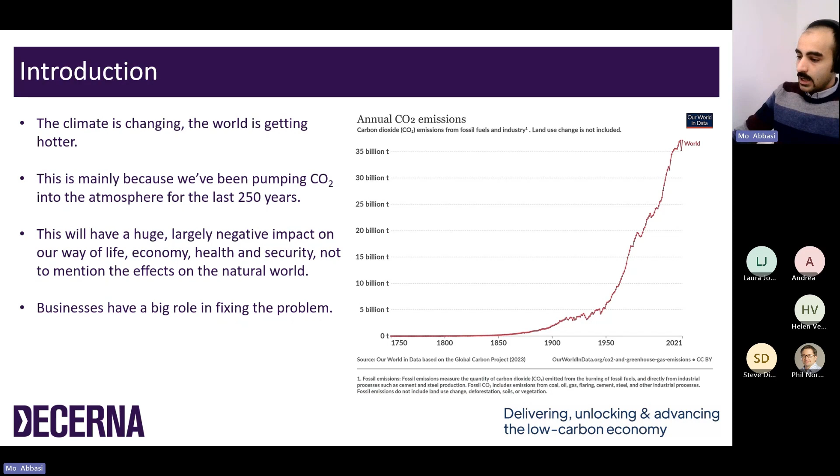Businesses generally play a big part in this, and can prevent or at least decelerate climate change, which, apart from the carbon reduction and environmental impact, creates some side financial opportunities and other opportunities for your business and company, and we will discuss them in the next slides.

So when it comes to climate change and global warming, every single half a degree matters. And one might think that it's okay, it's only 1 degree Celsius. I personally appreciate it. Here in Newcastle, it means a longer summer maybe, but it doesn't work like that.

The fact is that global warming, even very small temperature rises on a broad global scale, can have devastating results, because it directly increases the risk of sea level rise, wildfires, extreme weather impacts, species extinction, pandemics, drought, food insecurity, climate migration, and so many other problems on a global scale. And all of these consequences are sort of interconnected.

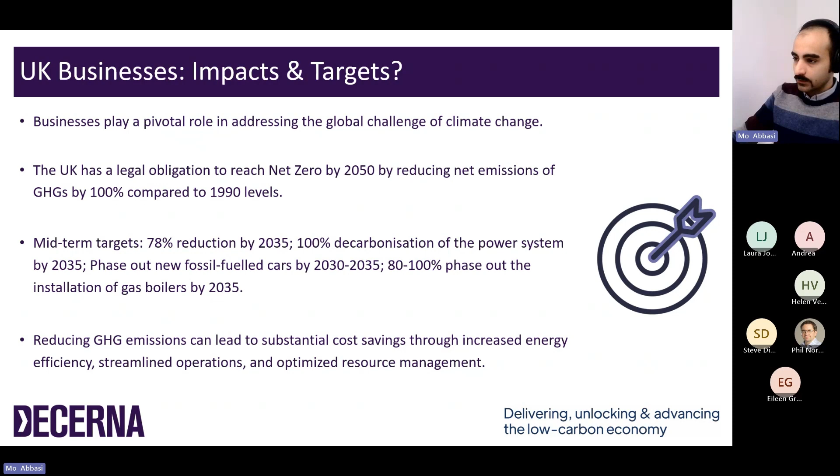And hopefully by the end of this session you will have the information you need to decide and know what options are available in the market for you to start this journey. Okay, let's start with some of the main principles that we all need to understand before being able to plan and design our decarbonization plans.

The first one, and probably the most important one, is emission scopes, which are the standardized way of categorizing greenhouse gas emissions based on their source. This categorization helps us account for all emissions, avoid double counting, and also identify the biggest gaps and the biggest opportunities within your business.

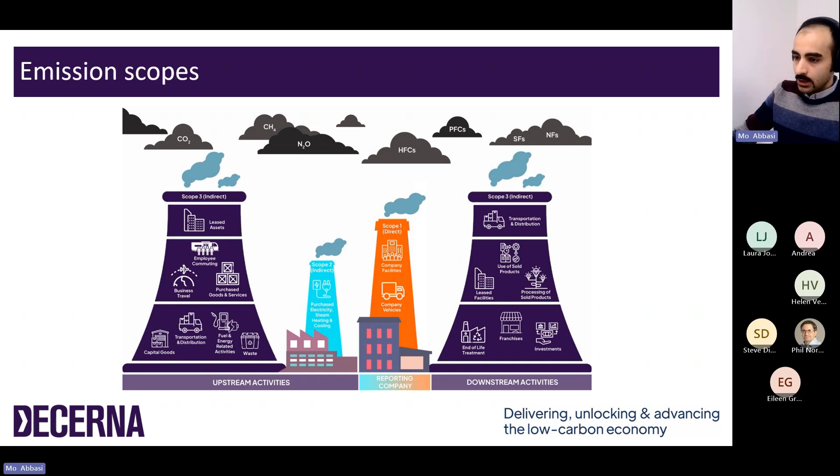Very briefly here, scope 1 are the direct emissions from sources owned by the company. Scope 2 are indirect emissions from the purchased energy that you consume in your premises, and scope 3 is all other indirect emissions from the company's operations. So the measures that we're going to discuss today mainly affect scope 1 and 2 emissions.

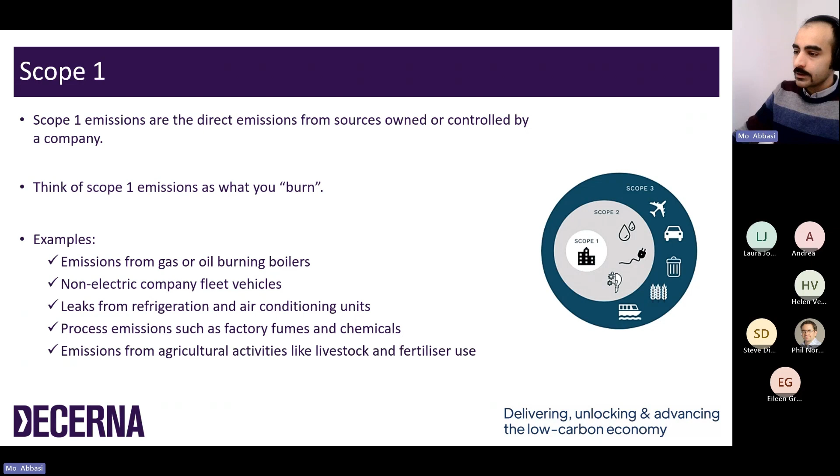Again, as we touched on, scope 1 covers the emissions from sources that your organization owns or directly controls. Some of the most obvious examples are the gas or oil that you're burning in your boilers, company vehicles that are not electric, leaks from the refrigeration system and all the refrigerants used in the equipment of your company, process emissions such as factory fumes and chemicals, and lastly emissions from agriculture activities.

Scope 2 emissions are GHG emissions associated with the purchased energy for your company. For most SMEs, scope 2 is just the electricity you buy from the grid, but you might have some heating from heat networks that goes under scope 2 emissions, or you might have some purchased steam for your industrial processes.

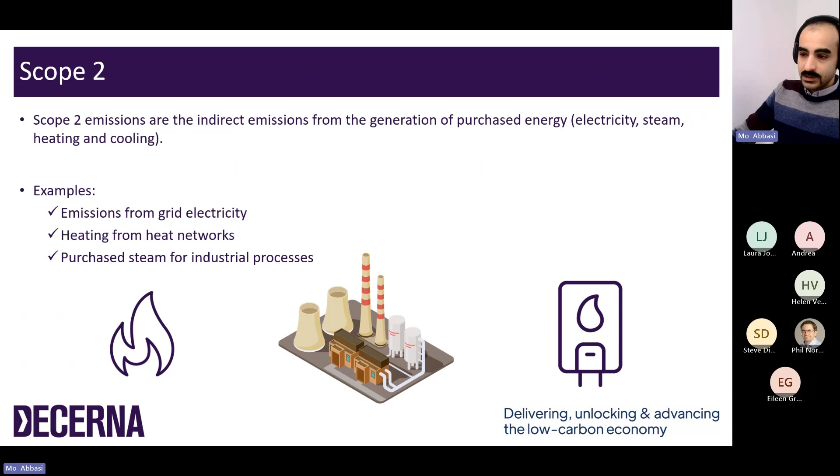And finally, scope 3 are all indirect emissions associated with the upstream and downstream activities of your company's value chain. Basically, all other indirect emissions which are not included in scope 2 can be categorized under scope 3, which for different businesses can vary between 50 even to 70–80% of the company's emissions.

Some examples are business travel in vehicles not owned by the company, staff commuting, emissions from purchased goods and services, for example raw materials, paper, coffee, IT devices, anything that you buy for your company, transportation of these goods, and also all emissions from own assets of the company. For example, if you have any investment properties, acquisitions, or other lending activities, they also need to be taken into account within the emission calculation of your company, and also the emissions related to waste management and disposal.

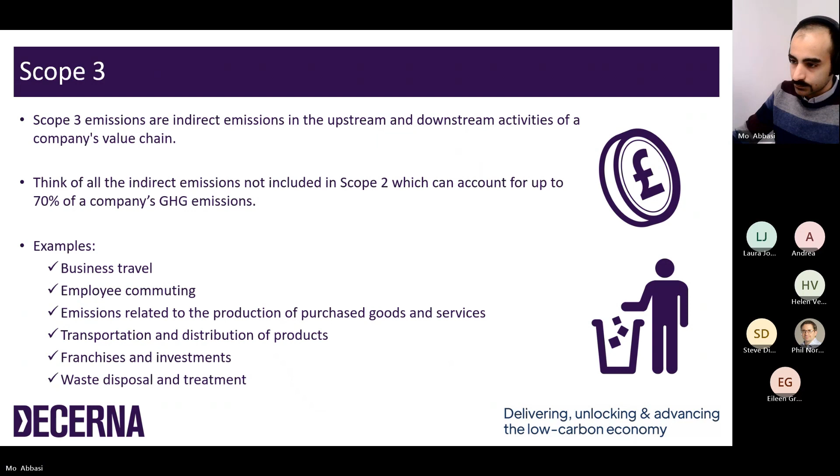But what does net zero mean? Net zero is the next fundamental principle that we need to comprehend. Net zero refers to a state in which the greenhouse gases going into the atmosphere are balanced by removals from the atmosphere. Achieving this balance between the emissions we generate and the emissions we remove or save, we call net zero. It can be achieved through a combination of two main strategies: one is reducing emissions as much as possible, and the first strategy needs to be combined with compensation for emissions by equivalent carbon savings elsewhere.

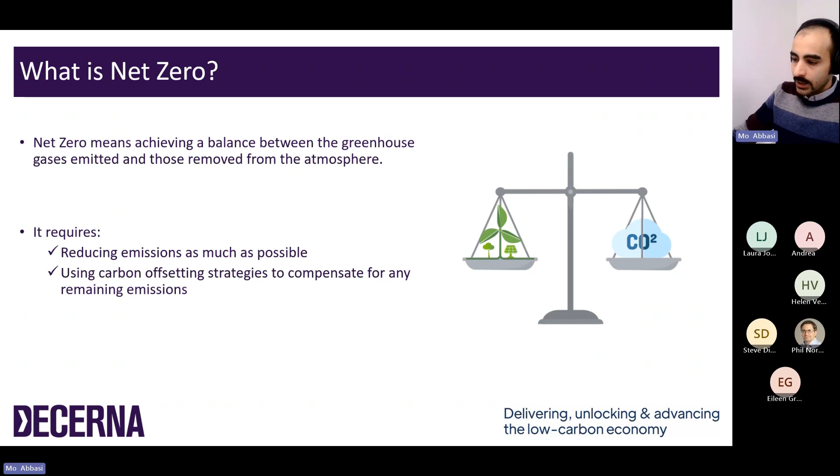But carbon offsetting itself can be achieved by two approaches. Firstly, compensatory offsets, which means buying emissions reductions from elsewhere. It means that you pay towards projects to reduce carbon emissions elsewhere, for example investment in environmental projects, renewable energy, waste management, and that sort of projects.

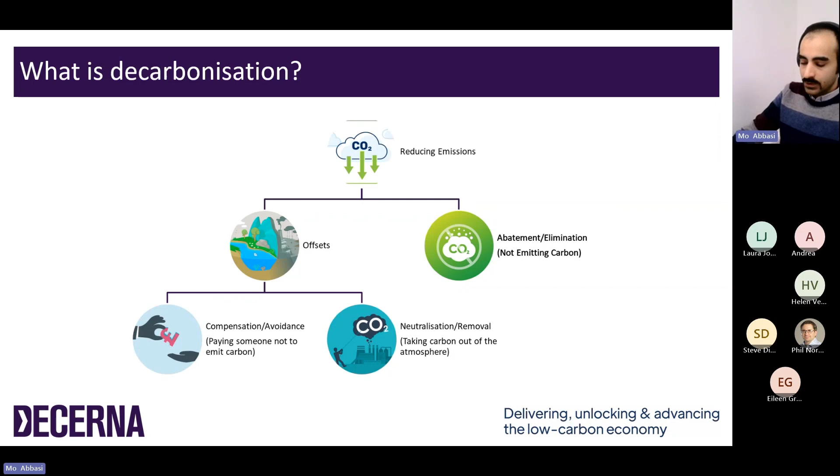And the second approach is carbon removals, using technologies like carbon capture and storage, or tree planting and reforestation. But carbon offsetting alone is not enough and doesn't make you carbon neutral. This should be accompanied, as we said, by implementation of suitable measures to proactively reduce your carbon footprint. This means avoiding emitting GHGs in the first place. This approach we call decarbonisation.

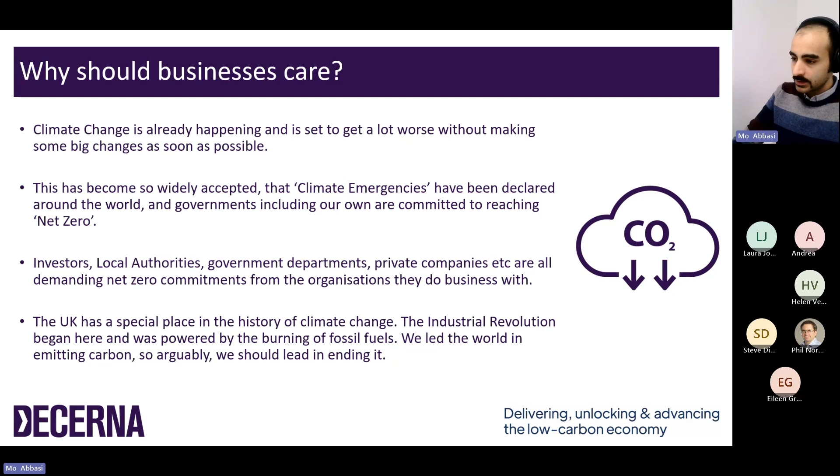So, as a business, why should we care about CO2 emissions? First and foremost, obviously, is the climate emergency and our social responsibility to tackle it. But apart from environmental and social responsibility, there are other benefits to reducing carbon emissions for SMEs as well. The first one is reducing operation costs. Cutting carbon emissions goes hand in hand with boosting energy efficiency, which means lower utility bills and other expenses. So although taking actions imposes some upfront costs, at the end of the day, when you have implemented them, you will definitely save money in the long run.

It also boosts your competitiveness in the market for your products and services, because customers are increasingly conscious and caring about environmental issues. So carbon reduction boosts your brand value and your reputation in the market. It also helps you keep up with regulatory compliance. We have, for example, the CRP requirement for government procurement, a regulation recently set up for businesses who want to trade with government in major contracts, and getting ahead of regulations and market shifts positions businesses to thrive in the long term as this transition continues.

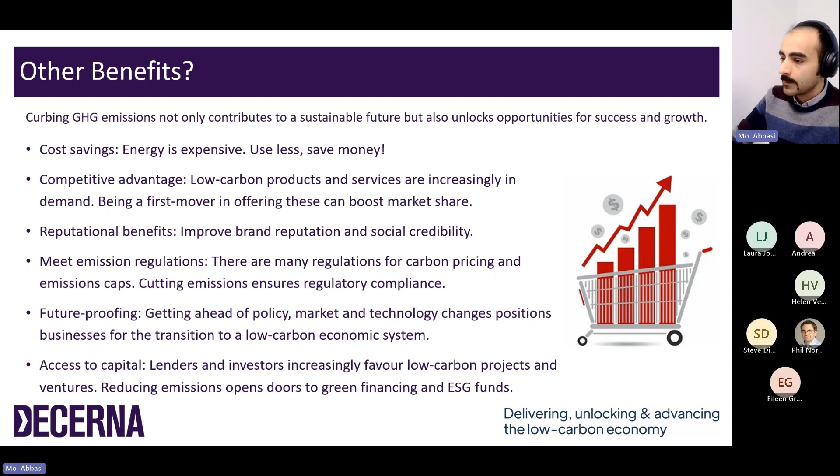And last but not least, it will enable funding opportunities and grants for your business which are allocated to businesses who want to be green, and there are lots of local council grants and governmental grants that you can apply for and use for your company. But where do we start our net zero journey?

In the third step, this is the step where we produce the carbon reduction plan, the CRP, which we touched on, and which is increasingly becoming central in the space, and is now the requirement for, as we said, major contracts with the government, and this is also one of the services that we provide. But today we are mostly focused on the fourth and fifth stage. Based on this plan, the next step will be implementing the energy efficiency and renewable measures and emission reduction interventions.

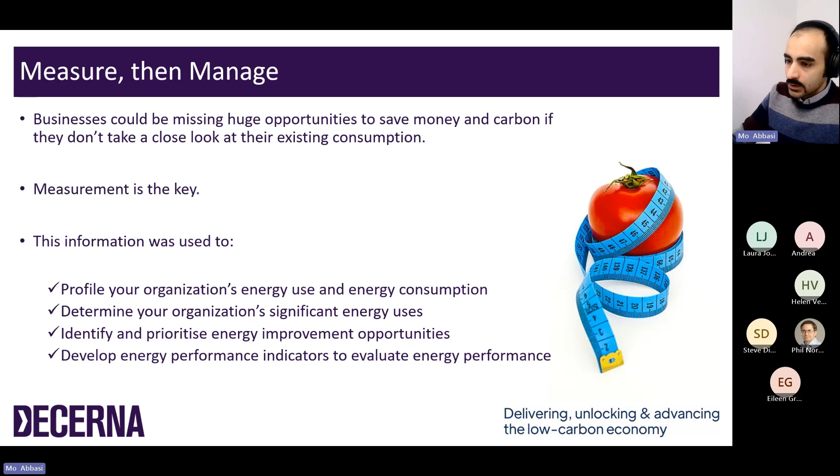The energy data that we need to collect as the first step can be obtained by measuring the energy consumption from utility meters, from electricity and natural gas, mainly located in the property. These data are often available in the utility bills, but more regular monitoring is also highly recommended to keep a record of the energy usage in shorter intervals, for example, every week or even every day. But if you have a smart meter already installed in your premises, you probably will be able to get the half-hourly data from the smart meters.

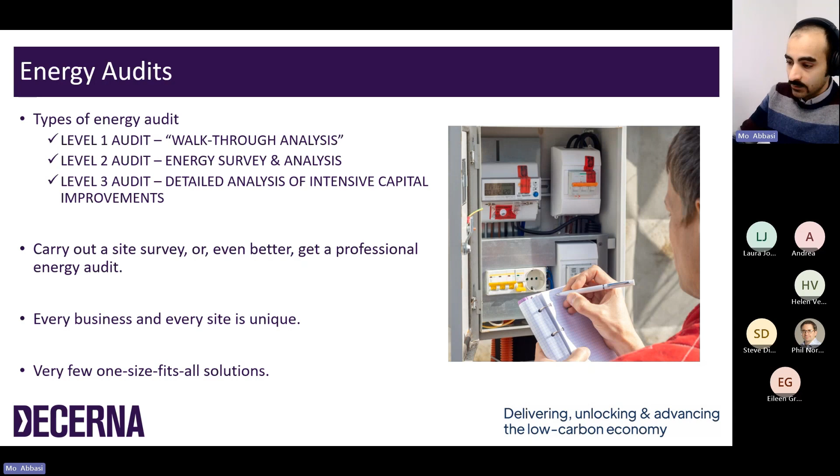But just that first level of energy audit gives you enough information to identify areas that require immediate attention and come up with some purpose-built and customized measures to reduce the energy consumption and also boost your environmental performance. Or, for level 2 or level 3, you can hire a professional energy auditor to conduct a more comprehensive one. But most of the quick win measures that we're going to cover today can be done based on the level 1 energy audit.

But let's give some top tips to help energy audits if you want to do it yourself. Basically, we need a record of all the energy consumption within the company, how, where, and when the energy is being used, and what is the regular routine of the energy consumption of the company. Therefore, we need, first of all, as many photos and notes as possible. You need to take photographs of building features, for example, the windows, insulation, HVAC systems. We need to take photos of lighting fixtures, appliances, and the plug loads.

Also, we need photographs of equipment nameplates where we can find their make, model, serial number, power rating, and information like that. Also, we have to make notes of the runtime hours, the temperatures, the environmental conditions, the notes that might be helpful in the future for planning and designing the energy efficiency measures. We also need to speak to regular users of the equipment and appliances at the premises, ask them how and how long they use appliances or equipment, if they perform well, or if it seems that they have some problems.

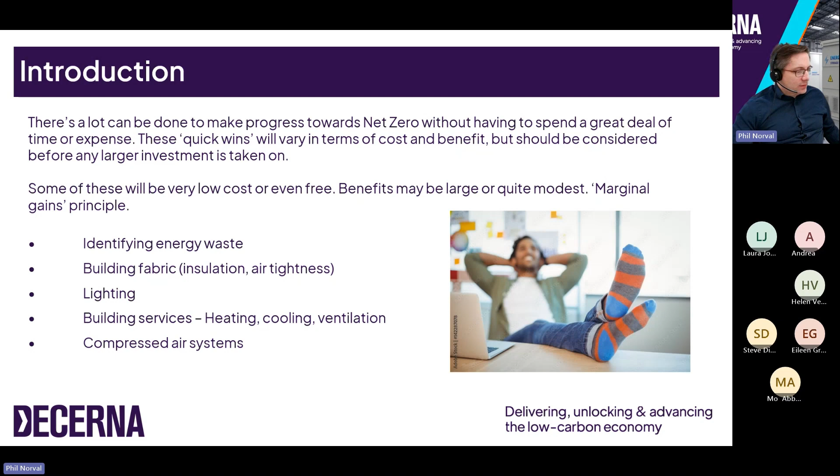And after that, I'll jump into a separate session just to introduce some concepts around renewables. So after the quick wins, we'll talk about the slightly more costly renewable energy systems for a little bit. So firstly, identifying energy waste.

We do an awful lot of site surveys, and as Mo mentioned, quite often the fresh pair of eyes is as much a benefit as any expertise that we might be bringing to the site. It's often the case that people are so heavily focused on doing their own work, working to their strengths and just carrying out their day-to-day duties, that they're not necessarily concerning themselves too much with energy efficiency, which is quite understandable. Energy efficiency is not always the most convenient thing to consider when doing your work.

For example, if it was in a factory, somebody might leave one of their tools switched on or one of their machines switched on just because it's convenient to have it on and ready for when they next need it. But it may be using energy the entire time it's on, even if it's just sitting on standby or idling. And that's a potential source for energy waste.

And it's things like that that businesses often overlook or just don't have the time or resource to consider day to day, and often they'll become blind to a lot of these things because thinking of it in any other way is kind of a hindrance to just going about the normal day-to-day work. So to make some easy improvements to energy efficiency, it requires somebody either from outside the company or from inside the company just to take a different perspective, take a step back, and think about these things from another angle, paying particular attention to energy efficiency.

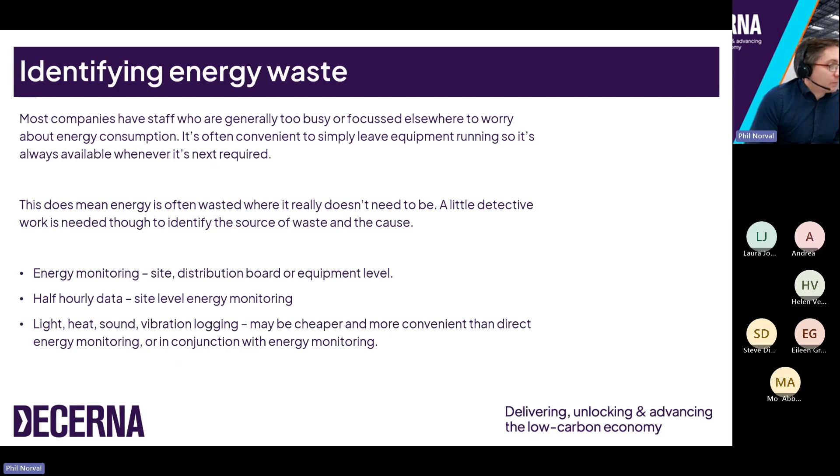And you can measure energy use indirectly as well, using things like environmental monitors and meters that record things like light levels or the temperature in a room, to indicate when lights are switched on or when heating is running, or in the case of a factory, if there's a lot of motors that are running, you can just record the sound or the vibration of that equipment, and that would indicate when it's been switched on and when it's been switched off. From that you can then work out how much energy it's consuming and how much of the time it is operating, and if that time use profile matches the work schedule, or if equipment might be getting left switched on outside of working hours, for example.

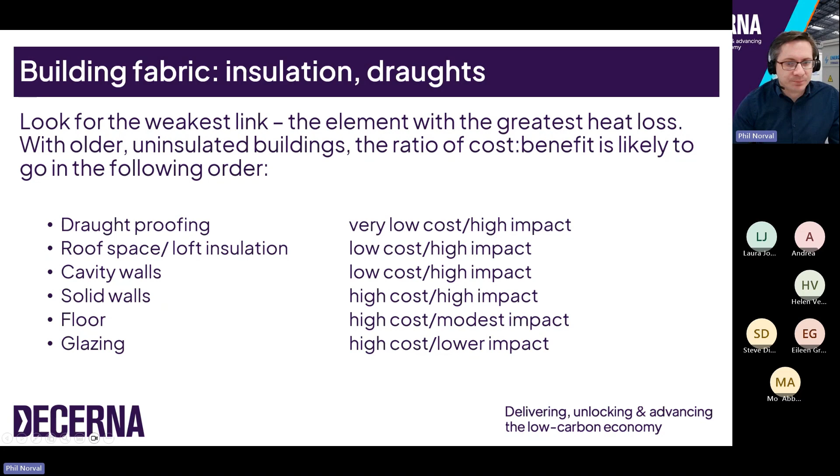So just bear with me a sec. Yeah, so

As I mentioned, draught proofing is the thing to do first, especially if you're looking for low cost options, or even no cost options in some cases. It's one of these things that is usually such a low cost with such a large impact on energy efficiency that it's probably worth doing without worrying about specifically how much energy it's going to save or how much it's going to cost to install, because it's one of these technologies that can generally be installed by people on site, by unskilled staff, with no specialist training needed.

A lot of the products that are used to draught proof a building are designed for consumers to install. And the draughts in buildings, poor air tightness in other words, is often the biggest component of heat loss in a building, particularly in commercial buildings. And therefore, it's probably worth just making sure that draughts are eliminated wherever possible, without needing to run any sort of particular feasibility study or business case assessment or anything like that.

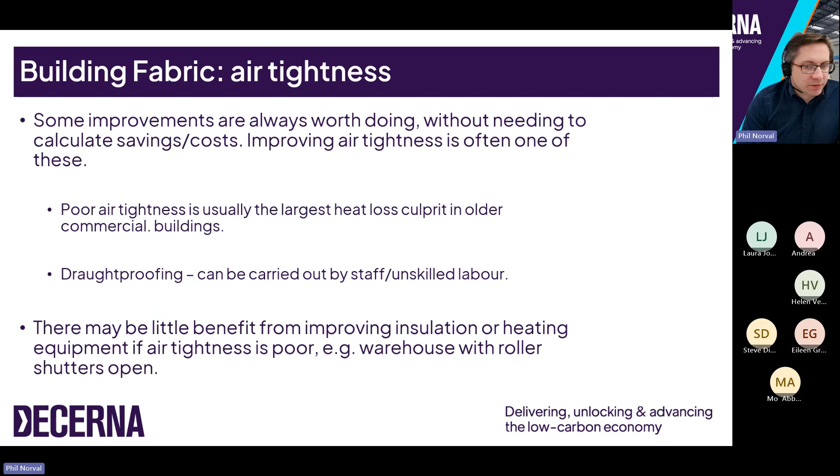So when it comes to draught proofing, it's actually more than the simple effect of reducing heat leaking out of a building. There is actually a compound effect that makes it doubly effective for the comfort level experienced by people in a building. Not only does sealing up draughts prevent heat escaping from a building, it also reduces the amount of air movement in a building.

So you've all heard the term wind chill. That's a sort of extreme version of this, but basically the more air movement there is, the more of a cooling effect there is on people's skin. And so you'll be familiar with the feeling of sitting in a draught, and that's not necessarily cold air blowing on you. It's just the fact that there is air moving at all. Air at a given temperature feels cooler if it's moving than if it's stationary.

So draughts in a building will increase the amount of air movement, and therefore for people to feel comfortable, the temperature needs to be that little bit higher where the air is moving around more. So sealing up draughts will have that double effect of preventing heat loss, but also making people just feel more comfortable at any given temperature.

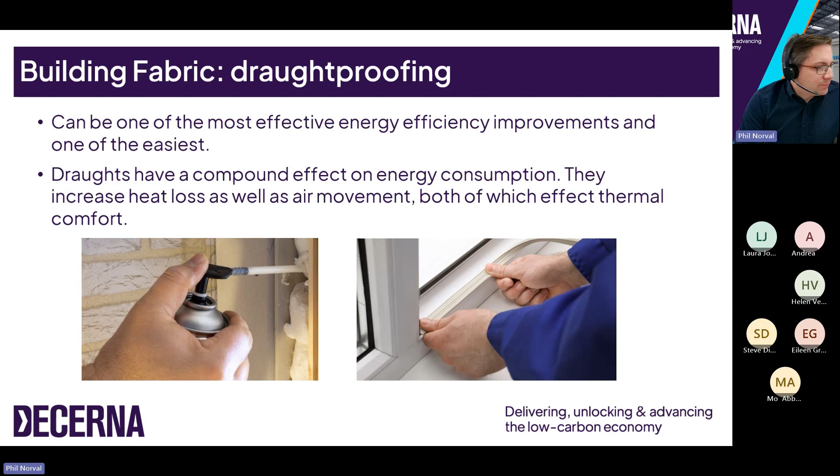So when it comes to draught proofing, it's worth doing a kind of site survey, really, to assess where air is leaking. It's quite easy to identify draughts. You can feel the cool breeze wherever there is a draught, as I'm sure you're aware. But it's worth carrying out one of these surveys even if you think that there have been air tightness improvements installed sometime in the building's history.

Over time, things like the foam rubber seals around windows and doors can deteriorate or they can be painted over. It's quite common to see these draught seals being gloss painted, and then they become far less effective, and they can become compressed and then begin to allow draughts to re-emerge through those openings. So it's worth just going around and seeing if those seals are actually doing their job. And it might be worth replacing them or adding more sealant into those areas.

There are cases though where simple improvements like adding some foam or brush strips or tape just aren't up to the job. Buildings do move over time. Things like windows and door frames and other sort of joins in a building can open up, and it can become such a problem that you do then need some professional help.

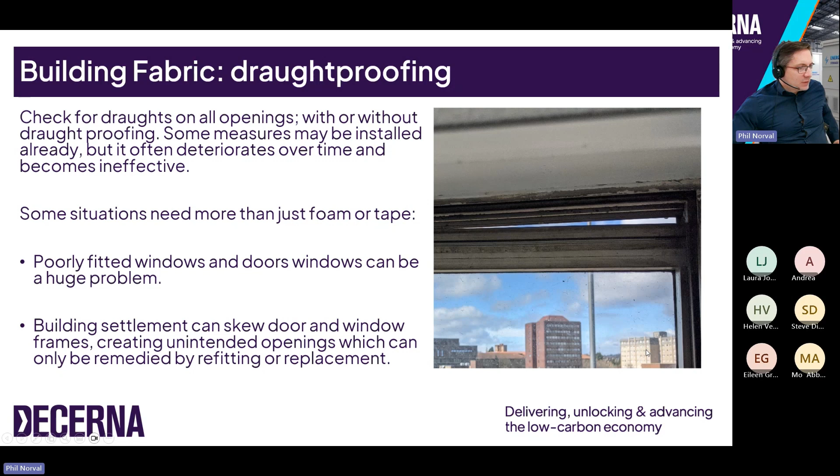So as I showed a few slides ago, there's this hierarchy of building fabric or insulation improvements. Once you've sorted the air tightness of a building out, it's then worth thinking about the strategy for improving insulation and sticking to that kind of hierarchy. If it's possible to insulate your roof space, carry out loft insulation; that's usually the cheapest and one of the most effective things to start off with.

It doesn't require a great deal of skill to install. It doesn't require a huge amount of disruption, and there's very little in the way of cosmetic remedial work required afterwards, because usually the loft insulation is out of sight and there's no actual fixing down required. So the cost is pretty low.

Similarly with cavity wall insulation, that's usually a similar price per square meter of insulation, but it's usually not as thick, so the energy savings from it aren't quite as good as loft insulation. You can see in this table the general cost per square meter and the payback period go in that kind of order. After cavity wall insulation, there are options for solid walls where there's no wall cavity, which you could insulate either internally in the rooms themselves or on the outside of the building.

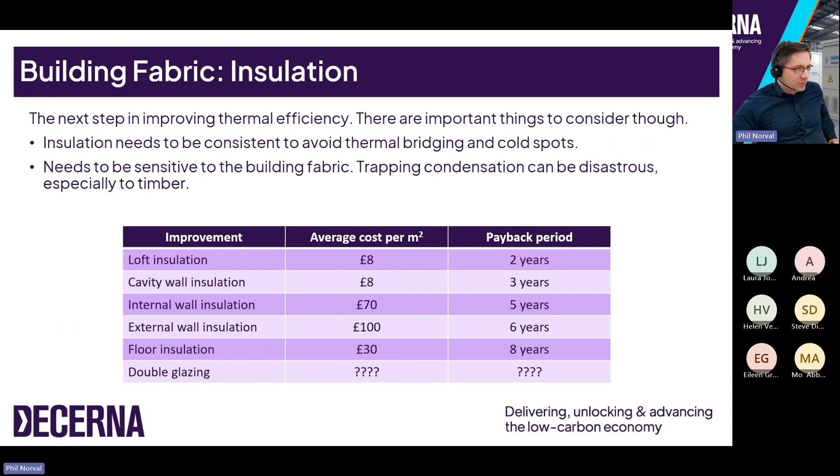In other words, if you have a business that replaces its old single glazed windows with double glazing, how long do you think it might take for the energy savings from that improvement to pay for the initial cost of the double glazing? My colleague Helen is going to unleash a quick poll on you, just so you can have a guess.

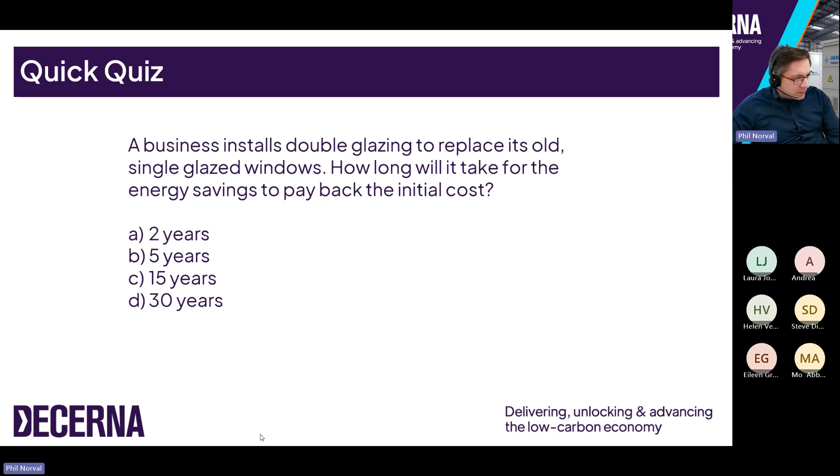Right, I'm just going to find my slides again. Here we go. Right, thanks for that.

So that was building fabric. I'm going to jump into LED lighting briefly, which is something that is pretty well understood now, and it's pretty well accepted that LED lighting in most situations is going to save energy compared to the older lighting types. And in fact, now it's really the only option that you have in almost all situations for new lighting.

There was a phase out that happened last year, towards the start of the autumn, which made it illegal for manufacturers to produce any new fluorescent lighting tubes. So even the more energy efficient thin type, what they call T5 fluorescent tubes, but also the older types of fluorescent lights, industrial lighting like metal halide, and I think high pressure sodium as well, not because of energy efficiency, but because all of those have some amount of mercury in them.

The environmental impact of disposing of them meant that they were no longer acceptable. And once retailers have sold out of all of their old stock, you won't be able to buy them anymore. So LEDs in nearly every case are the only option left. By default people will be installing new LED lighting, and they generally will save at least 50% of the energy consumption of lights if you're replacing older fluorescent lighting or similar.

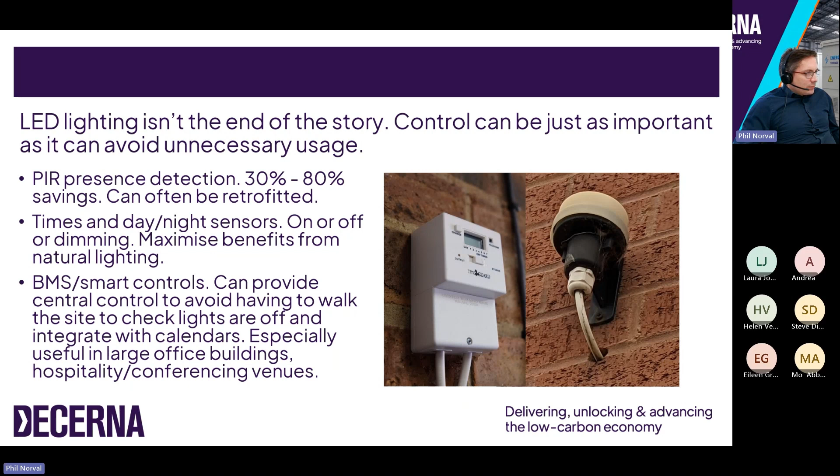It's worth being aware. I mentioned security lighting and outdoor lighting, but the traditional way to control these things is often with one of these mechanical time clocks. If you ever look in a plant room or a meter cupboard, it's quite common to see one of these, as shown in the photo there. They do a job. They switch lights off at a certain time of day and switch them on at a certain time of day, but they're very limited, and they're often completely ignored.

When they're installed, they're set up in a certain way and then never touched ever again. But they're not always set appropriately for the current use of the building. They only have a single on-off setting. So the major problem with them is that they will operate in exactly the same way 7 days a week. And so if you have a car park that has lighting controlled with one of these, for example, you may not need that lighting on over the weekend when there's nobody there.

Again, you probably don't need the same settings in the summer as you do in the winter. And so these kind of controls are not particularly smart. And in the case of a site that's closed during the weekend, you might be using 2/7 more energy than you actually need to. There's two days out of 7 that you don't need that lighting on, but this control type isn't sophisticated enough to deal with that.

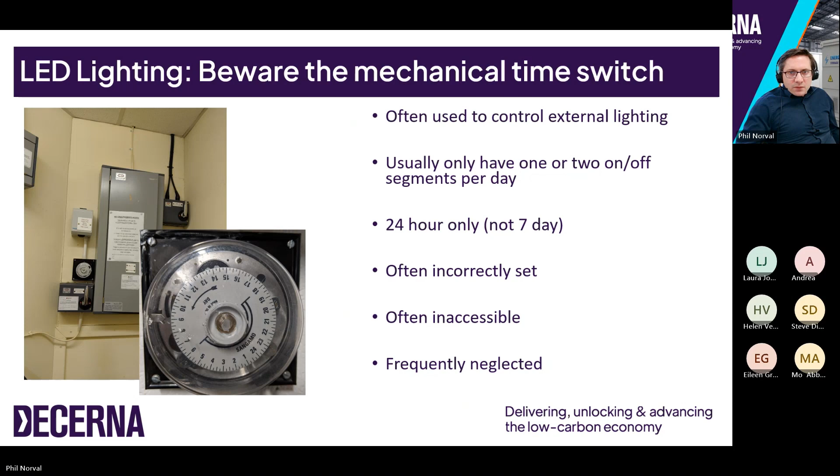So jumping now into... I'm just going to check the time actually. Oh, we're okay.

So we'll talk now a bit about heating, ventilation, air conditioning, or HVAC for short. Some elements of this people will be pretty familiar with, specifically the heating side of it, but the ventilation and the air conditioning is something that is usually left to experts to understand. But there are things to consider that don't need a great level of expertise to make improvements to. And so in general, there's some things to consider with these sort of systems.

I recommend that somebody in your company takes a look at least once every 6 months at things like the time settings for heating, ventilation, air conditioning, and the temperature set points that they've been programmed to. The reason I say at least once every 6 months is, especially where there's heating and cooling in a building, you have a heating season which usually starts around October and ends around March or maybe April. And conversely, you might have a cooling season which covers the other half of the year. And so these heating and cooling seasons run for half the year.

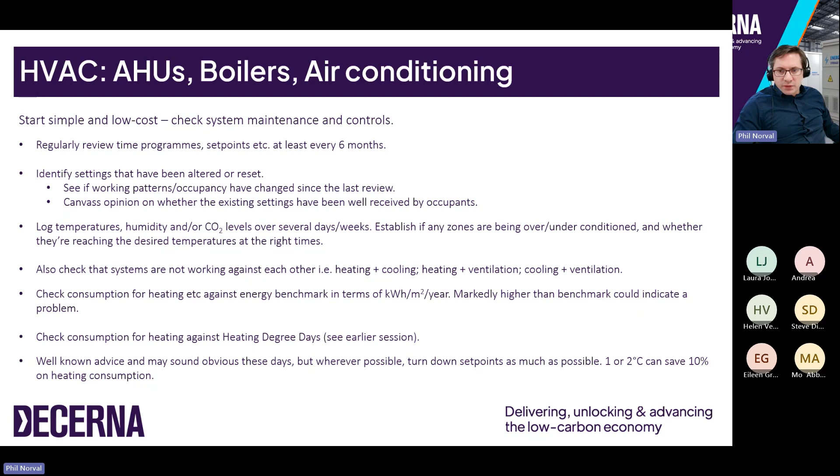Yeah, so that's some general points for heating systems, but getting into some more specifics, talking about simple improvements in terms of lagging of pipework. Again, this is something that can be done by non-specialists very often, unless it's a really sophisticated commercial plant room. But it's really common when you go into a boiler room to find there's lots of pipework that's not insulated properly.

And it's one of the worst places to have uninsulated pipework, because boiler rooms in particular are usually very highly ventilated where there's a commercial boiler, because they need air to mix with the fuel to burn properly, but also the ventilation is to get rid of anything like carbon monoxide that might have collected if the boiler's not operating properly. So it's a safety issue as well.

But the effect of having that much ventilation in a boiler plant room is that the space is effectively outdoors. The indoor air is mixing so quickly with the outdoor air that you're basically exposing any unlagged pipework to the outdoor air. And if you imagine the temperature of the outdoor air versus the temperature of the pipes, the heat lost to that air can be huge.

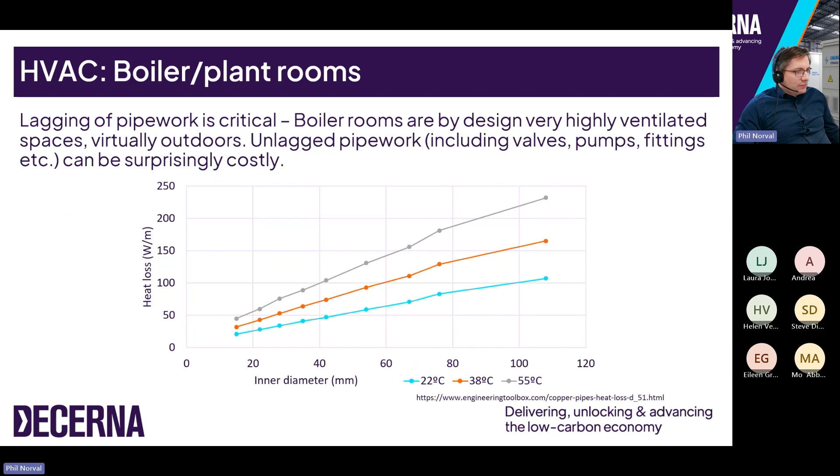So even pipes that are in the indoor space, the heated spaces, if they're unlagged, it represents heat loss that's completely uncontrolled. So if a boiler is running, but a particular room doesn't have its radiator switched on, the pipes feeding it will still be hot, and so they're giving heat into a room that doesn't require it. And so entire sections of buildings can have their heating switched off, but the pipes are still hot. And so without lagging those pipes, it represents a huge source of energy waste, or at least lack of control of the heating system.

Any pipework that is out of sight, particularly above ceiling tiles or in roof spaces, is often left uninsulated, and those spaces are not classed as part of the heated space. And so without lagging those pipes, it can be a huge source of energy waste. Above ceiling tiles, it's really common that there's openings in the walls at the sides of those spaces to let pipework in or to ventilate them for some reason. And so again, the outdoor air is circulating really well around those pipes, and the heat loss therefore can be really, really high. And because it's out of sight, it's often out of mind.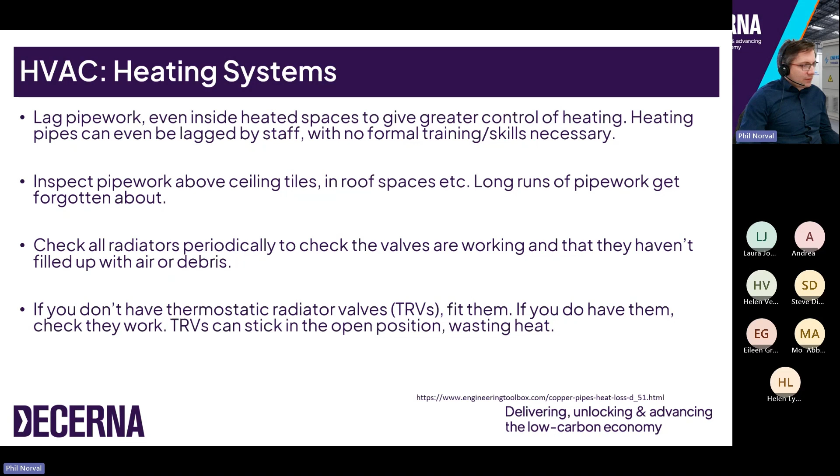But either way, it's either zero cost or very low cost to improve it, and it can save, particularly in a room that isn't in use, a huge amount of energy, because it can be the difference between a radiator operating at full blast or being switched off. And so it's another thing to consider during a site energy survey, just to verify that those valves are actually working properly.

So we've talked about heating systems, but another related area is domestic hot water. So the hot water that comes out of taps and showers. It's usually a smaller overall energy consumption, but it's quite often the source of a lot of unnecessary consumption as well, particularly in larger commercial buildings where they have what's called a secondary circulation system. If that's not something you're familiar with, basically you will have experienced being in a building where the hot water tap is a long way from the boiler or the cylinder, and it takes an age for the hot water to come out of the tap.

To avoid that happening in larger buildings, it's common to have this loop of pipework around which hot water is being continually pumped, so that there's only a short distance from that loop to the actual tap or shower outlet, so that for the convenience of people in the building, the hot water is readily available without having to wait for it to come through. So it's a really nice, convenient thing to have, but as you might imagine, that loop of pipework is nowhere near as well insulated as the cylinder it might be coming out of, if it even is insulated. It's really common to find these secondary circulation systems have no lagging on the pipework, either in the plant room or around the rest of the building.

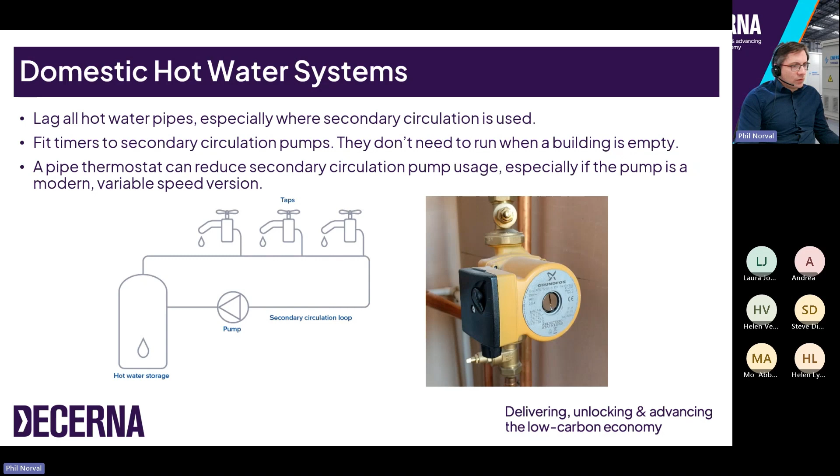This is a bit of a counterintuitive thing to consider, but in buildings where there's really long runs of hot water pipework to the outlet, so if there's a boiler room at one end of a building and a hot water outlet at the other end of a building, there could be a huge amount of heat lost just in the pipe that takes the heat from one end to the other.

And so although something like a gas hot water system is comparatively pretty cheap per kilowatt hour of energy compared to something like an electric hot water heater, the fact that that sort of situation can lose so much heat to the environment through the pipework means that the alternative option of putting a simple electric water heater at the point of use can actually be significantly cheaper than sending heat all the way from the boiler to where it's needed.

Also, in some situations you might be heating up an entire 100 or 200 litre hot water cylinder just to provide hot water for the short amount of time it's needed at the other end of a building. So in that kind of situation, you're heating up far more water than is actually needed for the demand. And so something like a small point of use electric water heater can be tailored to the demand a lot better. Although it's more expensive per kilowatt hour, the number of kilowatt hours used can be much lower by that setup. So it's a bit counterintuitive, but in some situations it's probably worth considering.

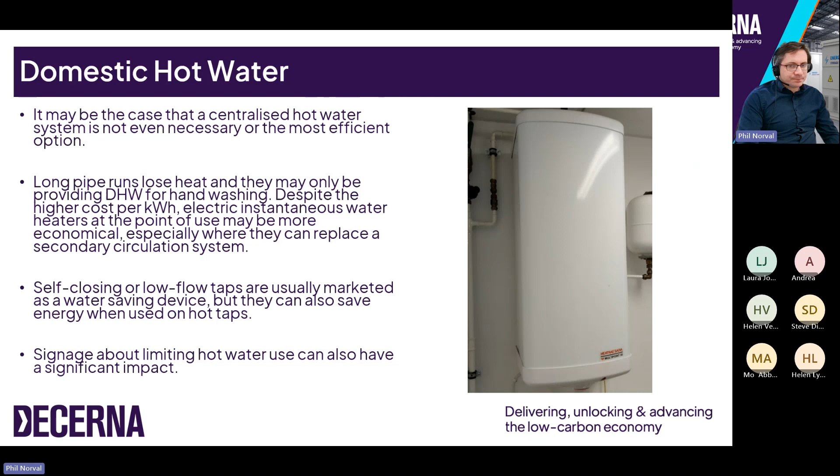So in other words, if you double a fan speed, you'll actually increase energy consumption by 8 times. It's not even a square relationship, it's a cube relationship between those two values. And so just modest changes in fan speed will have a huge effect on energy consumption. So if you're looking at upgrading a ventilation system, getting some sort of automatic control with variable speed fans will definitely save a lot of energy.

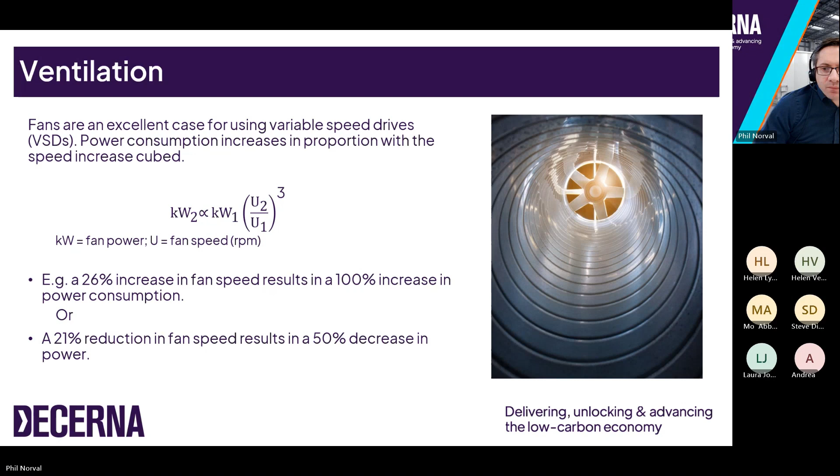Moving on from ventilation, just briefly to air conditioning. It's increasingly common in this country to have air conditioning in buildings, for 2 reasons. Partly climate change, temperatures are getting higher, particularly in the summer in the UK, but also there's been a trend to have more and more electrical equipment in buildings than there were historically, particularly in modern offices.

You've got so many computers, printers, other electrical devices, for either productivity or just convenience or luxury. The number of electrical items in most buildings is much higher than it used to be, and all electrical items give off some amount of heat. It's more obvious with things like printers and photocopiers, but collectively the amount of heat given off by electrical equipment has gone up a lot over recent years, and that is often combated with air conditioning.

But before anyone installs any new air conditioning or switches the cooling on in a building, it's worth considering: is it even necessary? Are there other ways to reduce the temperature of the air in a space other than just switching on cooling systems? Another reason why cooling is becoming increasingly common, particularly in modern office buildings, is the amount of glazing that is used in the building's construction.

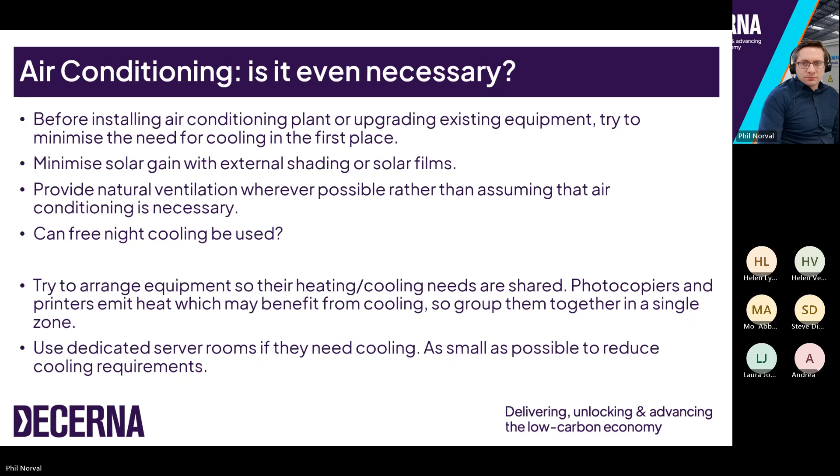Again, similarly to ventilation systems or HVAC in general, ensuring that they have been properly and regularly maintained is key to their efficiency. So where you do need air conditioning, make the most of it and make sure it's properly maintained. Often, again similarly to mechanical ventilation systems, the outdoor units in particular are nearly always installed high up on a wall or on a roof somewhere. And so they're usually completely out of sight of most people in the building. And so they'll get forgotten about if there's not a regular maintenance program in place. And it's kind of assumed that it'll just continue to work forever without any intervention by anyone.

But again, air conditioning units have heat exchangers with these aluminium fins all over them, and they'll get a buildup of dirt and dust, and even things like weeds will grow up around them. Birds may build nests next to them. They will gather dirt and dust really quickly, and if they're not properly cleaned and maintained, the efficiency of them will drop off a cliff. So getting somebody to look at them at least once a year is really important.

And also make sure that the refrigerant pipework that carries the cooled refrigerant into the building is properly insulated and that the lagging around it hasn't deteriorated or been chewed by rats or pecked by birds. That'll have a really high impact on the performance of the system.

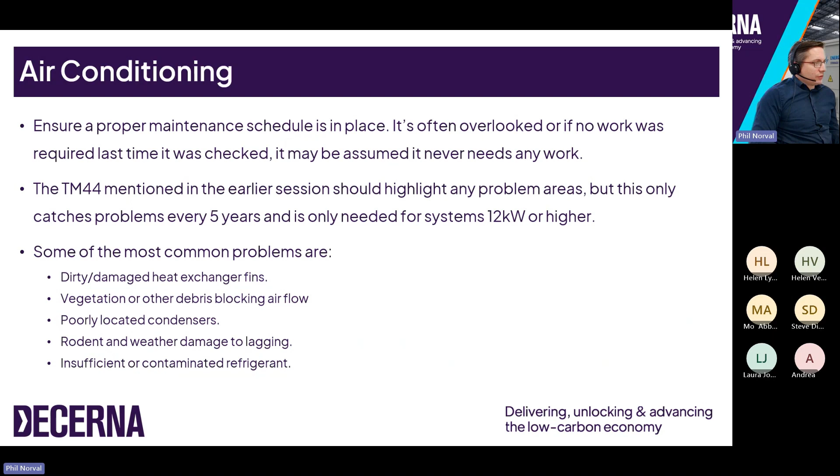If they're on auto, then the time programs and temperature settings can be used to switch the boiler on and off as appropriate, but in hand mode, they're just on. And so the energy saving controls of the system have been completely sidestepped in this case, and so the system is just wasting a huge amount of energy.

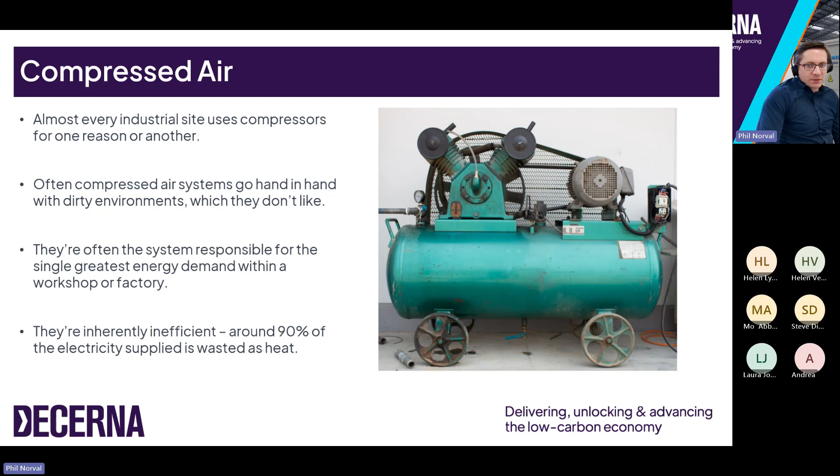The ongoing air distribution system, so the air lines, pipework around a site that takes compressed air from the compressor to the tools and machines that use it, is something that needs to not be ignored as well.

It's really common when we visit a site where there's a compressor that there's just a deafening hissing sound coming from all sorts of places around the building, and that hissing noise is compressed air leaking out either from tools or from pipework or fittings. And usually that doesn't need to be happening, but these hissing noises in a noisy factory often will just get ignored.

And like we said about having a fresh pair of eyes on site, a fresh pair of ears is really helpful in these situations, because people do over time just become deaf to these kind of leaking noises. But getting somebody that isn't always on site just to have a quick listen, they'll be able to remind people or point out where there is air leaking if it has been ignored.

If the environment is so noisy that you can't hear air leaking, there are relatively inexpensive ultrasonic leak detectors, and ultrasound is really directional, and it can be easily picked up by these detectors and can show you in which direction the sound is coming from, so you can actually pinpoint the source of air leakage, and they can be quite effective to find them.

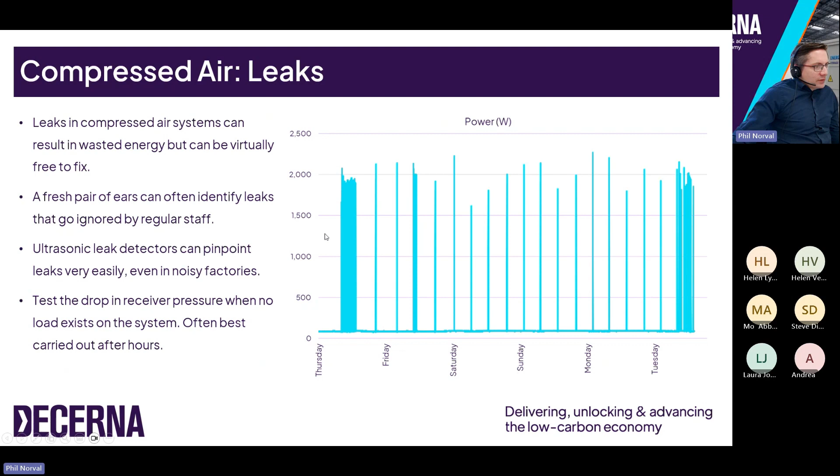Just going to do a quick quiz question. You've already seen it, in fact, earlier on, but now that you can see the context, we're just going to run a quick poll to see how much you think a fairly modest air leak might cost per year. So if you have, for example, a flexible hose with a 3mm split, so pretty small split in the hose, how much do you think that might cost a business on average per year? There'll be a poll coming up in just, actually I can't see the screen. There, so yep, have a go answering that question there.

Okay. So yeah, a mixture of responses there. So it's actually, hang on a sec. Yeah, so most people think £1,000 a year. That might have been true a couple of years ago until energy price inflation went through the roof. It's actually closer to £2,000 a year just for that tiny little 3mm split in a pipe.

So you can imagine in a factory where there's several of these leaks, just getting a small, almost zero cost repair done. It might even be a case of tightening a pipe fitting. So virtually zero cost to fix these leaks can rapidly amount to thousands of pounds saved each year. And so it's one of these things that seems really small, but it can have a huge impact on the cost of the energy for a business. Yeah, thanks for that. Whenever we do a site survey, we love to find air leaks because it's such an easy thing to fix and has such a huge impact.

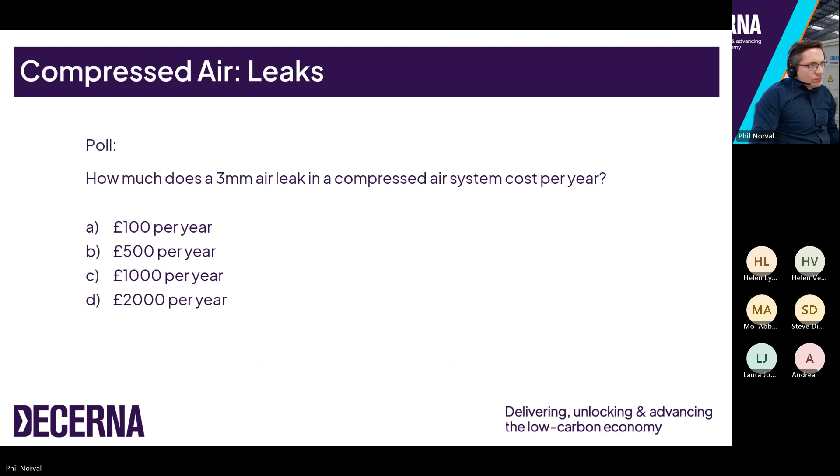So just a little bit more on compressors. Reducing the overall demand from compressors is the easiest way to save energy. So firstly, it's really common to find that the set point pressure of these things is higher than any of the equipment that uses the compressed air actually needs. If you can reduce the pressure set point from say 8 bar to 7 bar, you'll be saving literally thousands of pounds a year if the compressor's used all the time. So carry out a review of the equipment using compressed air and just make sure the compressor isn't set too high for it.

Again, the older compressors or smaller compressor systems, they'll have some sort of drain system to get rid of any condensate, any water in the air that's in the pressure vessel.

Some older systems, the only way to get rid of that condensate was just to dump all the compressed air out of it. And I've seen sites where people drain the entire compressed air system on a daily basis just to get rid of any water in the system, because water is quite damaging and will corrode the pipes in the pressure vessel over time and could become quite dangerous.

So getting rid of the water is important, but modern pressure vessels should have some sort of drain that doesn't require venting all of the compressed air out. But also, particularly with larger systems, you can get air dryers which take out the humidity in the air before it gets into the pressure vessel.

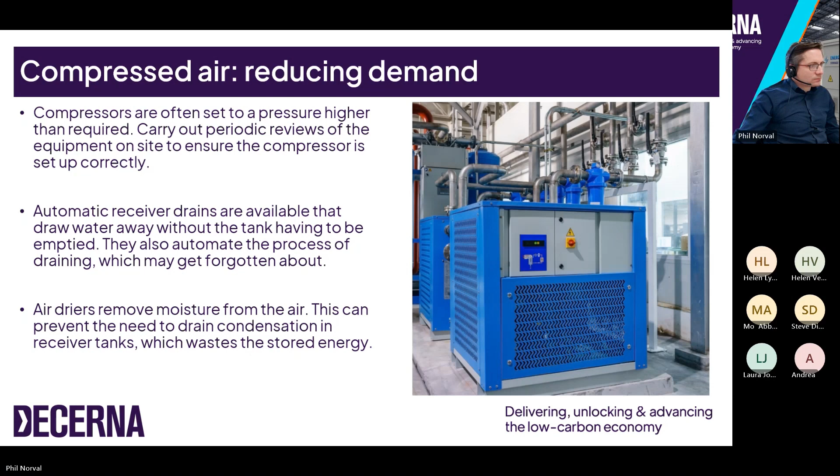Finally, on compressed air tools, particularly things like wrenches and sanders, air hand tools in particular, they're really traditional, really common, because they're so powerful and portable, and they're really, really common in factory situations.

But because things have come quite a long way with cordless battery-powered tools in recent years, it might be worth seriously considering not using air tools at all anymore and replacing them with modern cordless battery-powered tools, just because they're so much more efficient, probably safer as well.

If you remember that a compressor is inherently at best about 10% efficient, once that compressed air gets through the mechanics of the tool and down the air hose, the overall efficiency is going to be well below 10%. But compare that to a modern lithium-ion brushless motor powered tool, the efficiency of that could easily be over 80%. And also they only use energy exactly when it's needed, as opposed to having a compressor on all the time.

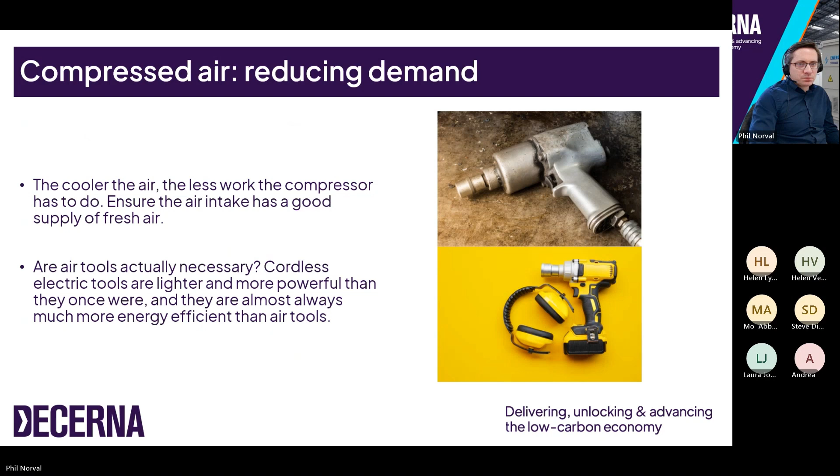Coming towards the end of these slides, weirdly, I'm going to talk about where to start now that I'm coming towards the end of this session. So just some general pointers. Try to take a whole site holistic approach to energy consumption and energy savings, so that you can take a more strategic approach, ensuring the overall system is as efficient as possible.

In the way that we were talking about with the LED lighting earlier, taking that whole site approach can identify savings that you otherwise might not think of if you look at things in an individual granular way. And so to do that, carry out a site-wide energy audit to identify as many opportunities to save energy as possible before you go about implementing any specific one of them.

So you can then identify the low-hanging fruit, the things that are going to have the biggest benefit for the least investment, and start with those, and then work down to the things that are perhaps going to cost more or have a more modest benefit. And develop that holistic strategy across the site, and that should ensure that you spend money more wisely, and reduce the need to spend an awful lot of money early on.

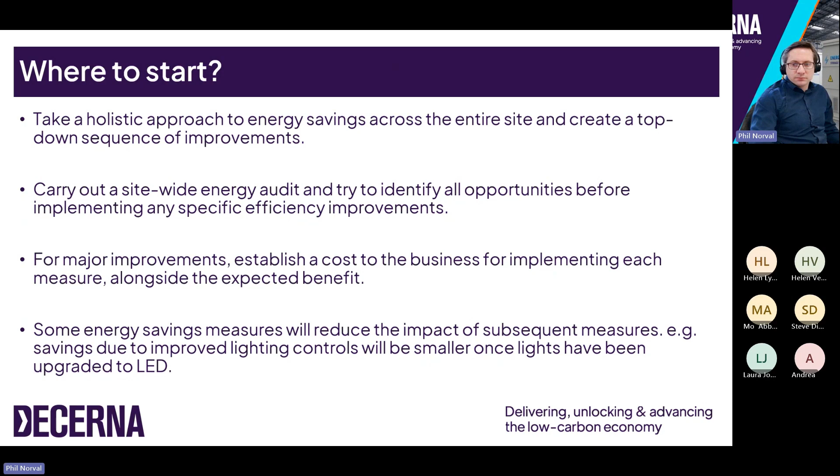Just a few slides to finish this little session on some sort of mistakes and what not to do, a few myths that you might have heard to do with energy efficiency. Got quite a few listed here, but just to get through the slides a bit quicker, just going to touch on a couple of them. I've mentioned things like cooling server rooms, but there's a few things worth mentioning.

So firstly, destratification fans, ceiling fans, as you might be more familiar with, particularly in buildings or rooms with a really high ceiling, it's quite common to see fans at the top of them. And people quite often think that switching them on in summer is a good idea because it'll create a breeze in the room and cool people down. But that's the exact opposite reason of why they're usually installed. And they're called destratification fans because that's what they're designed to do. They're designed to prevent hot air from rising and sticking at the top of a building or of a room.

Switching the fan on disturbs that layering effect of hot air at the top, cold air at the bottom, and pulls the hot air back down to the sort of ground level and mixes it up. So if there's hot air collecting in a building in summer at the top near the roof, switching those fans on will have the opposite effect on people. It'll actually make it even hotter for them if they switch those fans on. So I've seen that quite often, and it's a bad idea if people want to be cooled down in summer with one of those fans.

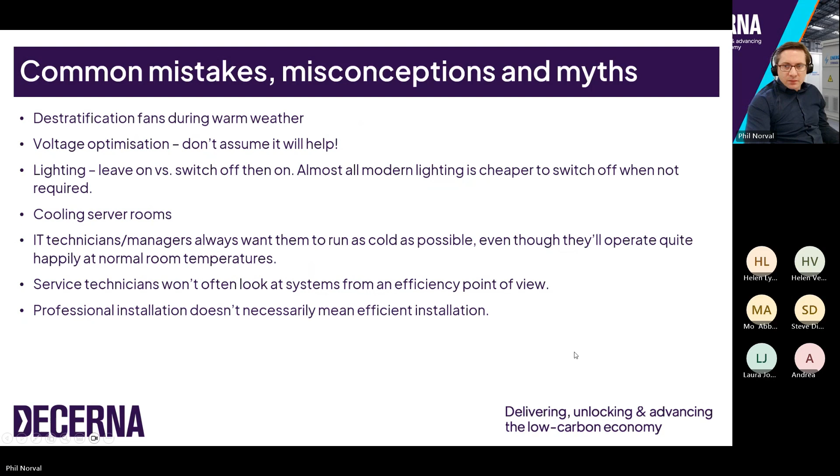Finally, we don't have time today to talk about user behavior. That's a separate session on its own, really. But it was quite popular, quite common to see energy efficiency campaigns such as the reminders to switch lights off and labels and things next to light switches, next to taps. They've gone out of fashion, and it's a real shame because they do work. There's complex psychological reasoning behind doing some of this sort of stuff, but the fact is that these kind of campaigns do work.

Consider just doing simple, virtually zero cost things like putting some awareness posters about energy efficiency around buildings, putting reminders at the point of use for equipment that uses energy, such as near light switches, remind people to close doors to reduce air leakage. Tiny little simple things like that can just nudge staff into a more energy efficient, energy conscious way of behaving. And it's one of those things that's very hard to actually measure the impact of, but it's probably worth doing anyway.

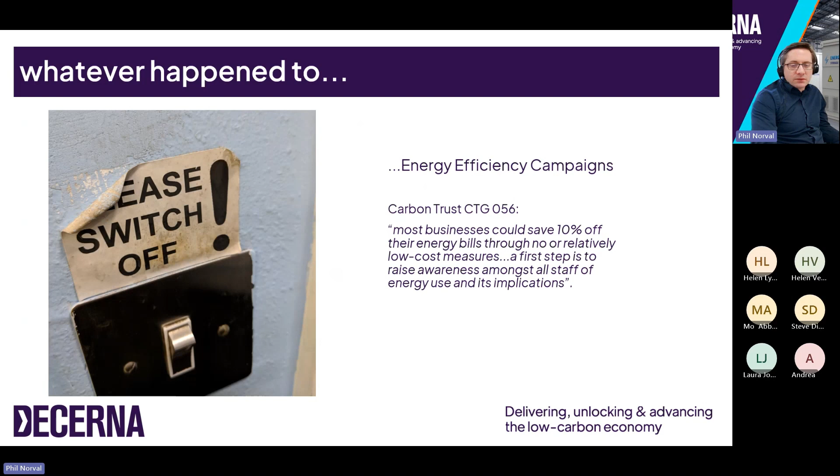Right, I'm just going to show you a few slides of examples of what not to do. Here's some air conditioning units installed outside to avoid causing an unsightly eyesore. They're hidden away in this little sort of alleyway alcove area, but it's one of the worst places they could have been installed for energy efficiency, because there's a ceiling, there's a sort of outdoor cover above them, which means that the hot air that they're kicking out, they're rejecting heated air to provide cooling on the other side in the indoor space, and that hot air is just going to be collecting in that area.

It's got nowhere to go, and that's going to make the whole system work far less efficiently. They need a good supply of fresh air circulating around them to work properly. They're also blowing at each other, so they're blowing warm air on each other, which is even worse than that sort of stationary warmed air. And therefore they almost couldn't be a worse place to install them outside. The only worse thing would be to install them inside somewhere.

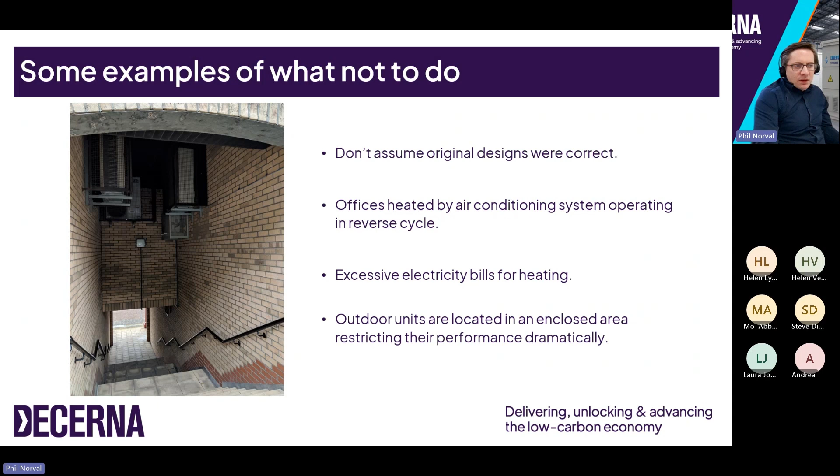Here's another example of something fairly silly. This was a fashion design and retail company that have created these design offices within what used to be an open plan office space, and you can see the sort of UPVC double glazed partition on the right hand side there. Behind those partitions are where the design offices are, and this corridor is where all the radiators are from what used to be the open plan office.

And so there's, I think, six great big double panel radiators there, blasting away, kicking many kilowatts of heat just to warm that corridor up. And right above them is a load of very leaky single glazed windows. So all of that lovely double glazing on the partitions is providing almost no benefit, and all it's really doing is ensuring that as much energy as possible is escaping out of the building from the corridor.

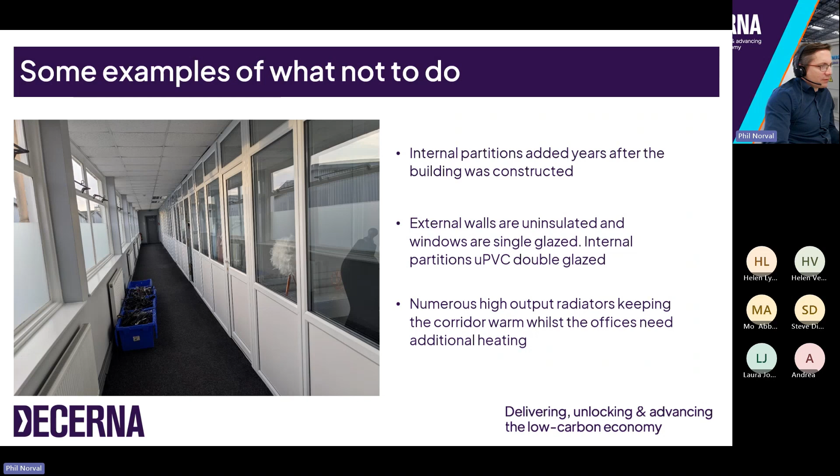And funnily enough, at the same site here is another good example of what not to do. So this is a warehouse where all of the fashion items are sold and dispatched from. Within this space, though, you can see in the middle of the picture, there's a single story concrete block built internal space that's been created. I think it's a photo studio that's inside that. It's got a sort of flat roof built within the warehouse itself. What they failed to do was think about the lighting, though.

So everything else in the warehouse has been left as it was, and on closer inspection you can see these light fittings that have been highlighted. All they're doing is lighting up the top of the flat roof above that photo studio, and I think they're 400 watts a piece. So we worked out about 3,000 kilowatt hours a year in wasted energy from those two lights that are doing absolutely nothing for the people in the building. And you can imagine it's going to be about £1,000 a year that's being wasted just by not considering things like the lighting setup when they built that new space.

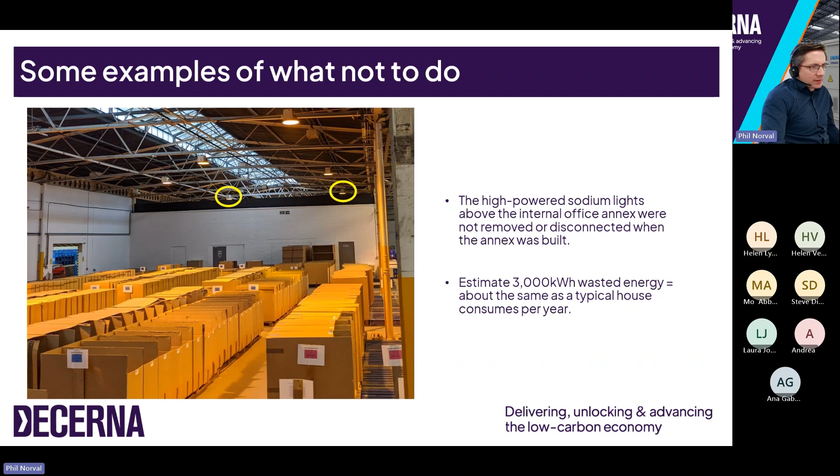So generally, decarbonisation. The general approach should be reduce consumption first before jumping into more exciting things like renewable energy. Reducing consumption is not something that people get anywhere near as excited about as fancy new equipment like solar panels. But if you want to have the biggest impact for the least capital cost, then this is the way to go. When it comes to the heating or cooling of buildings, take a fabric first approach. So look at draught proofing, insulation, maybe glazing before you think about installing something like a new boiler or a heat pump.

And also in general, decide if you really need equipment, if something is actually essential to the business. Are there different ways of providing the same function in a way that doesn't use energy? Much as we considered the air tools versus cordless power tools, there are quite often more modern alternatives that serve the same purpose without using as much energy. So just try and think a bit more laterally about equipment and functions and operations of the business to see if there's another way of doing things that doesn't necessarily have to use energy in the same way as it might have once used energy.

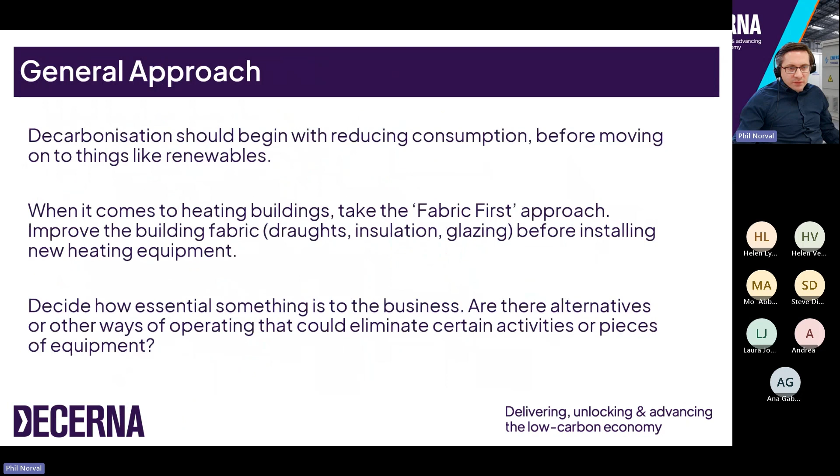Oops, where are we? Jumped far too far ahead in this. Sorry, here we go.

So yeah, renewable energy. We'll do a quick introduction and talk about the various different technologies available, the more common and beneficial ones, at least, for businesses in the UK. You may be familiar with some of this, you may not, but it's going to be a bit of a whistle-stop tour of renewable energy systems. So it's not so much quick wins, but if you really are interested in installing any renewable energy systems, then having a decent basic background understanding of what it's all about is a really good starting point, so that you know if it's going to, at least in principle, provide you with some benefit or not.

So we'll start with the most popular thing, solar photovoltaic energy, PV. It's all the rage for good reason, because it's come down in price so much in recent years. The cost per panel did go up a bit. With energy price inflation, it was so in demand that the cost of the equipment went through the roof, but it's come back down again now to the point where it's pretty much cheaper than it's ever been. And it's very, very reliable. And it's also something that people have a decent intuitive understanding of. It takes light from the sun, turns it into electricity, job done.

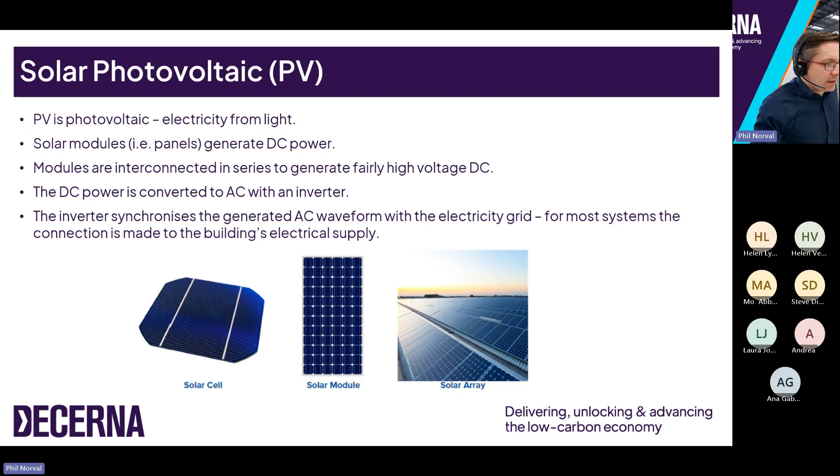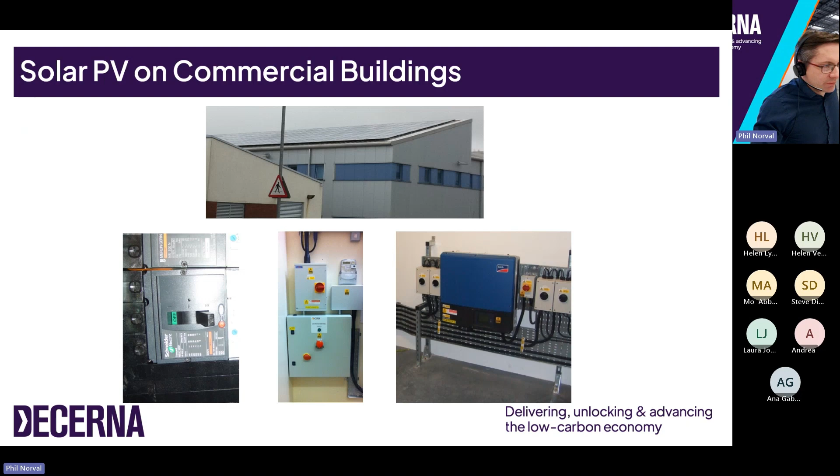So a few considerations around the performance and feasibility of PV. Firstly, as you might imagine, the power generated depends on the amount of light that's actually hitting the solar modules, and that is going to be impacted by various different factors. Firstly, obviously, if there's any shading on solar modules, that will impact the amount of energy that is being generated.

But it's important to know that in a simple standard installation, any module that has any shading on it will actually restrict the power output of the entire array, because it effectively acts as a bottleneck for all the electrons that are flowing around. So avoiding shading of any amount on any individual module can have a huge impact on the overall performance of the system, unless you have some more sophisticated optimization equipment, things like micro inverters or module level optimizers, as they're called.

Avoiding shading anyway is a good principle to go by. But also the overall installation specifics, such as the angle, if it's on a roof, the direction the roof is facing, the angle of the roof pitch itself, could be anywhere from a flat roof all the way to a very steeply pitched roof. For any given location on the globe, there's actually an optimum angle for solar modules to be tilted at that matches the latitude that you are in on the globe.

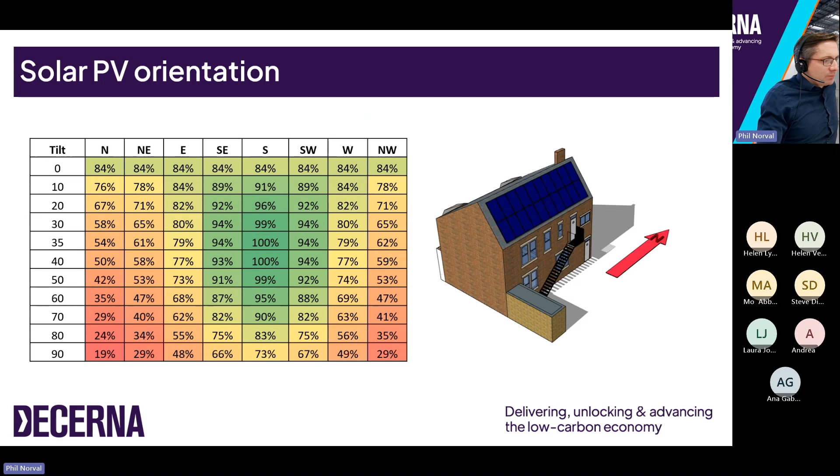So some quick pros and cons. Some positives, some benefits of solar PV: firstly, they're extremely reliable. You can easily expect a 25-year lifespan out of the equipment, and even at 25 years, modern modules are usually going to still be operating at about 80-85% of their designed performance. And there's very little maintenance required to keep them running at that level of performance as well.

The actual energy output of modules is pretty easy to predict. There's freely available data on the amount of sunlight available in any location in the world over a year, and so you can quite easily simulate how much energy any given solar system design is going to put out over a year. And so developing a business case for a solar PV system is pretty straightforward in a lot of cases.

There's pretty straightforward energy savings to be had. So any kilowatt hour that a solar PV system generates, if you use it on site, that's a kilowatt hour of grid electricity that you don't need. And so there's a pretty straightforward benefit in terms of energy savings from the grid.

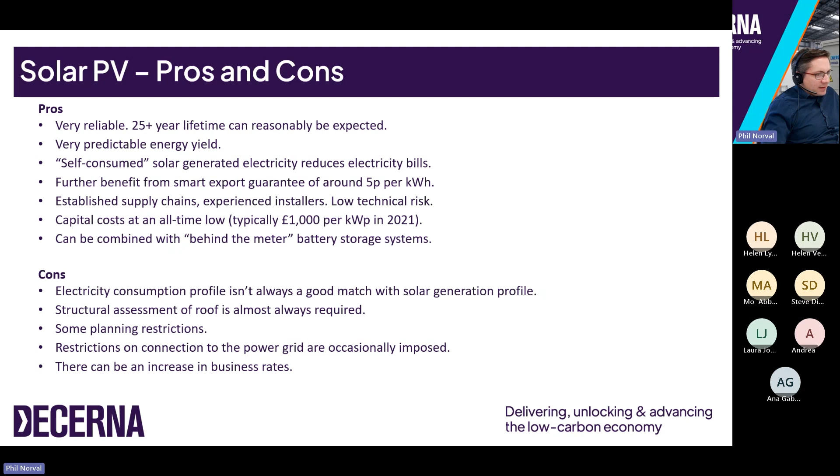I'll just very briefly touch on solar thermal. It's something, if you're familiar with going to the Mediterranean, you'll see on almost every rooftop. In the UK, it's far less popular. It can still be pretty effective in providing buildings with hot water, but it can be quite expensive though.

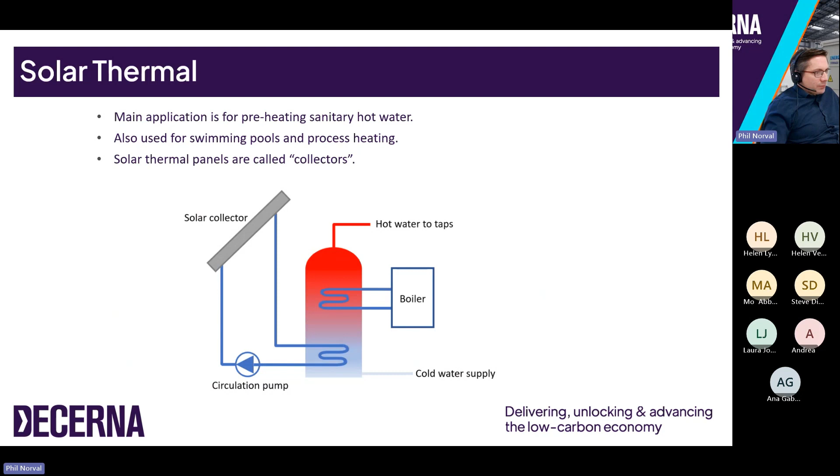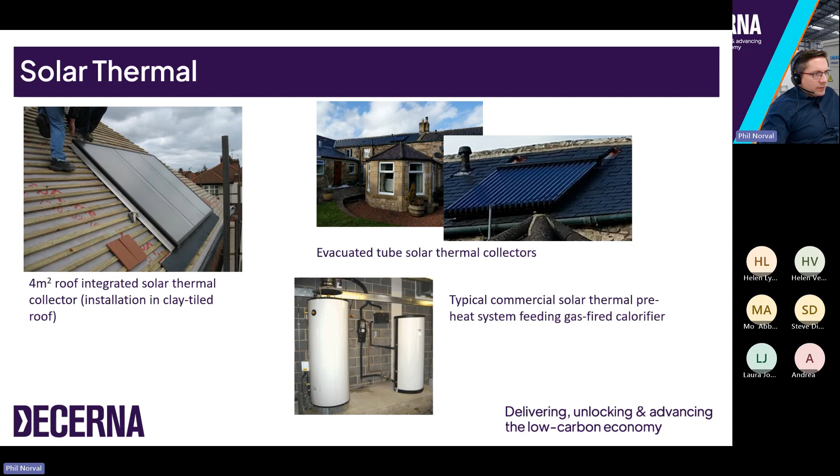So yeah, in this part of the world, solar thermal is much less popular than solar PV. Although the systems themselves are pretty efficient compared to solar PV, the cost of the equipment is really high in comparison. In some cases, it might work really well anywhere where there's a really high demand for hot water. Very predictable demand for hot water, especially even through the summer when there's the most sunlight. That's when it might make sense. But in general, because it's so expensive, the energy savings through having a solar thermal system very often don't recover the cost that's initially paid for it over the expected lifespan. So you could be talking 15 or 20 years payback period for that sort of system.

Again, there are similar disadvantages to PV, things like needing a structural assessment of the roof, some planning restrictions, and there is actually also more maintenance required of this system. It does require somebody at least annually to check that the system is operating and set up correctly. Again, as I mentioned earlier, with hot water, there are some hygiene implications if it's not properly designed and maintained.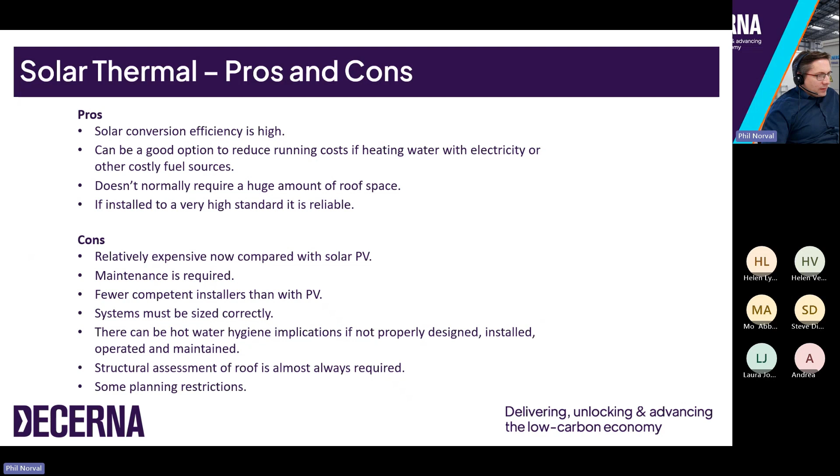Because anywhere where there's hot water being stored, there's a risk of Legionella that needs to be properly understood and avoided in any way possible.

So moving on to renewable heating options, specifically we'll talk about heat pumps. I've got a little animation here just to explain how heat pumps work. But this is an example. There's various different types of heat pump. You will have heard the term air source heat pump, and then there's ground source heat pumps and water source heat pumps even. But they all work on a very similar principle.

They're effectively designed to take heat from one place and move it to another place, but somewhere during that process, there's a compressor which causes the temperature to increase, and that's key to the whole system being effective, and that's why you can take heat out of somewhere cold like the outdoor air, and provide useful heat in a warmer space, such as inside a building.

So the general case here is an example of what is called an air-to-air heat pump. It takes heat from outdoor air and puts it directly into the air inside a building. And I'll just briefly explain the basic principle of how they work. So there's a heat exchanger outside. Air is blown over the heat exchanger, and on the other side of the heat exchanger is a fluid called a refrigerant, and that's got a low boiling point below the temperature of the outdoor air.

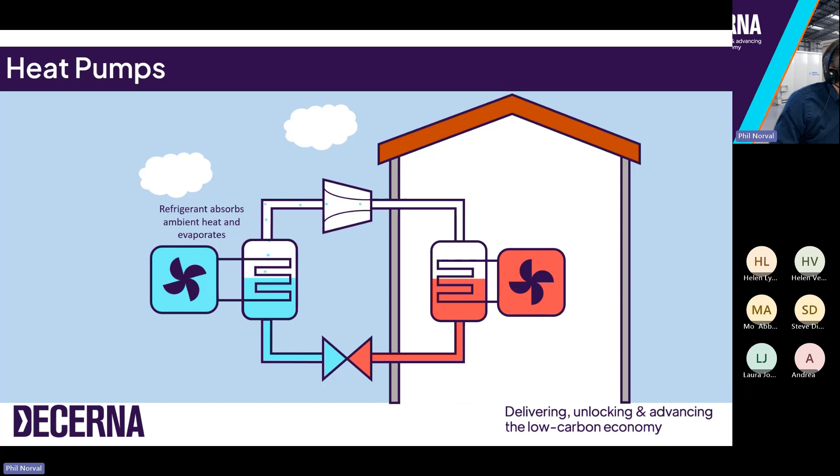And so when the air is passed over that heat exchanger, the refrigerant will evaporate and start flowing around the system. So as it evaporates, it absorbs heat from the outdoor air, and that heat is carried away with that evaporated refrigerant. It then goes through a compressor, and we talked about compressors earlier. The act of compression causes the temperature to increase, which in this case is a good thing. That rise in temperature means that when the refrigerant goes into the building, the temperature of that gas is higher than the air temperature surrounding it.

So there's then another heat exchanger inside, which allows that high temperature gaseous refrigerant to dump its heat into the air via that heat exchanger. And as it dumps its heat, it condenses back into a liquid. It's still at high pressure though, but it's now cooler. So the high pressure liquid refrigerant continues on its way round to what's called an expansion valve, where it's allowed to depressurize back to the pressure level that it was originally at.

So you've now got cold liquid refrigerant that is back round to the start of the loop, ready to absorb heat from the outdoor air again. And it's a continuous loop that keeps going round and round. But that's the basic principle of how a heat pump works. And it's the same process as a fridge or a freezer, but it's flipped around so that you're benefiting from the heat output rather than the cold side.

So that was an air-to-air heat pump. This is an example of an air-to-water heat pump here. Looks very similar as an outdoor unit. Looks more or less the same as an air conditioning unit, and they're basically the same sort of thing. But in the case of an air-to-water heat pump, the heat exchanger and refrigerant are putting heat into the water that feeds radiators rather than going directly to the air inside a building. That's really the only important difference.

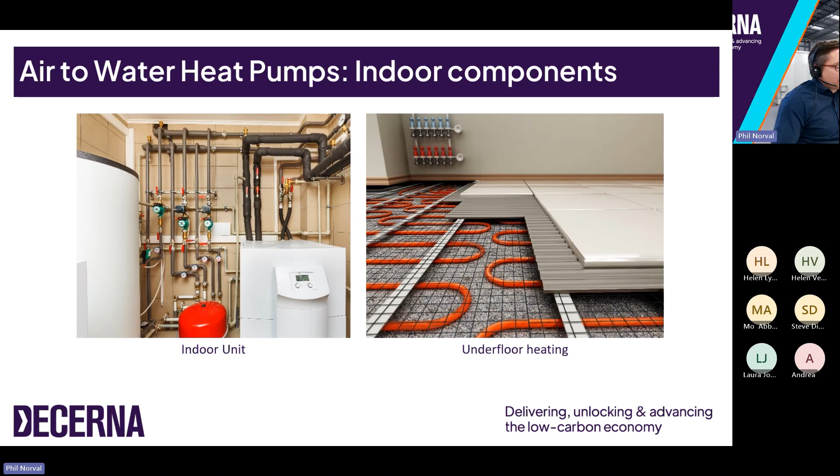The temperature of the water that comes out of a heat pump, for the system to work efficiently, is generally considerably lower than you might get from a gas boiler system, for example. And so lower temperature means to give a certain power output to maintain the desired room temperature requires a much larger amount or size of heat emitters. So if you've got radiators, you might need to double the size of the radiators or double the number of them, or use something like underfloor heating where there's a really large heat emitting surface area so that lower temperature can effectively heat the space in a reasonable time.

So, air to water heat pumps. There's an important thing to mention about heat pumps in general. Sorry, let's go back to this slide. They use electricity to operate, to run the compressor and run the fans. They don't use electricity directly to heat the room.

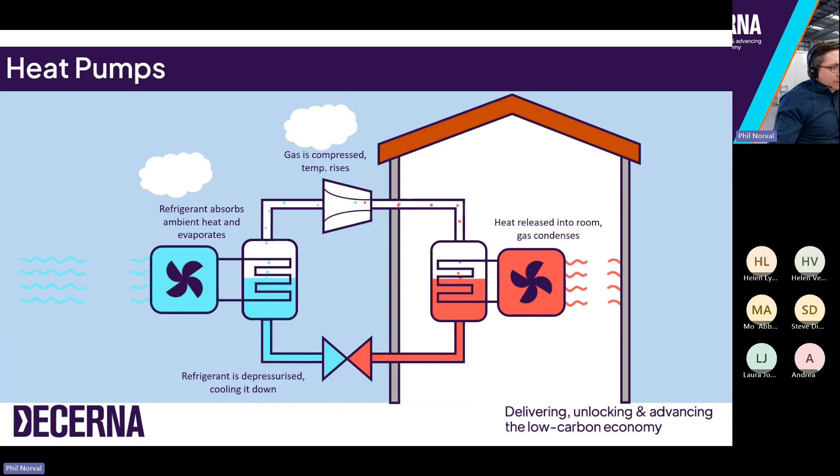So for every kilowatt hour used to operate the system, they tend to shift 3 or 4 kilowatt hours of thermal energy from the outdoor air to the indoor air, and that ratio of 1 kilowatt hour of energy used to 4 kilowatt hours of heat, that's called its coefficient of performance, and that's the key to their efficiency compared to something like direct electric heating.

So if you're replacing direct electric heating with a heat pump, your energy consumption will go down by that coefficient of performance ratio. So it'll be a third or a quarter of your energy consumption, and similarly, the greenhouse gas emissions will go down by that sort of ratio.

If you are, however, replacing something like a gas boiler system with a heat pump, the carbon emissions will go down a lot, but the cost of running it may not go down as much because gas is typically much cheaper per kilowatt hour than electricity, and it's quite likely that gas could be only a third of the cost of electricity. So if you only need a third of the kilowatt hours, but it's electricity, it's going to be about the same price as using 3 times the number of kilowatt hours, but of gas. And so the cost benefit, if you're replacing an efficient gas boiler system, might be a bit marginal at the moment.

So yeah, the heat pumps, if you keep them simple, air to water heat pumps can be very reliable. The key is simplicity, though. If you try and introduce other sources of heating, like introduce a boiler system, if you try and get it to do fancy things with hot water as well, or have other features that make it more complicated, that's when heat pumps do become a bit less reliable and hard to understand.

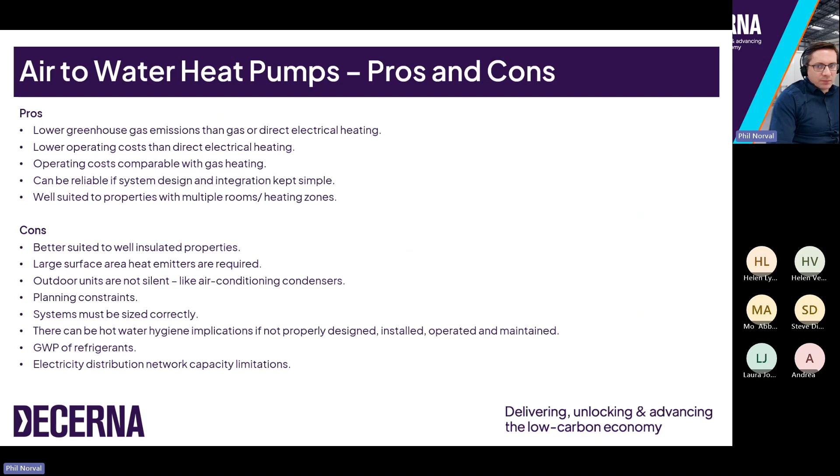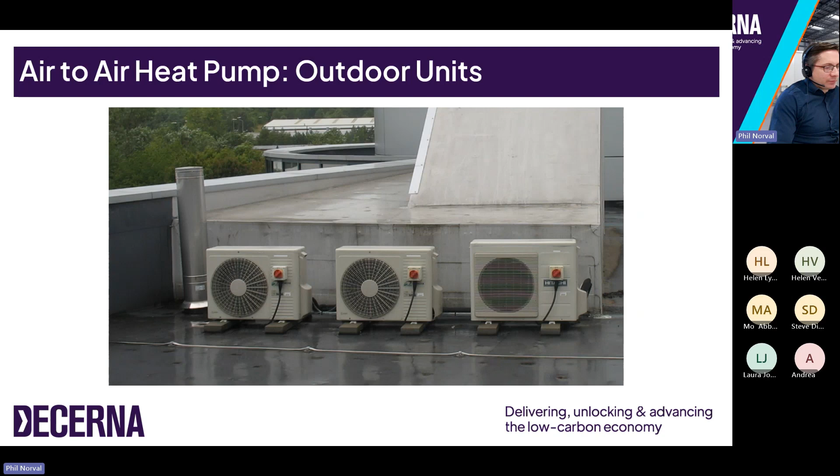Air-to-air heat pumps: the animation that we showed, that was an example of an air-to-air heat pump. Basically, it's an air conditioning system, but when we say air-to-air heat pump, we're talking about the provision of heating rather than cooling into a space, but they're basically exactly the same thing. And modern air conditioning systems can run in heating mode or in cooling mode.

So you're probably familiar with what the indoor air conditioning units look like, but here's a couple of examples: a ceiling mounted one and a wall mounted unit. It's a common misconception with these sort of systems that they're bringing air into the building from outside; in most cases they're not. There's no ventilation function. All they're doing is blowing air over a heat exchanger, so taking air in from the room and blowing it back out again, but warmer or cooler depending on how the system's operating.

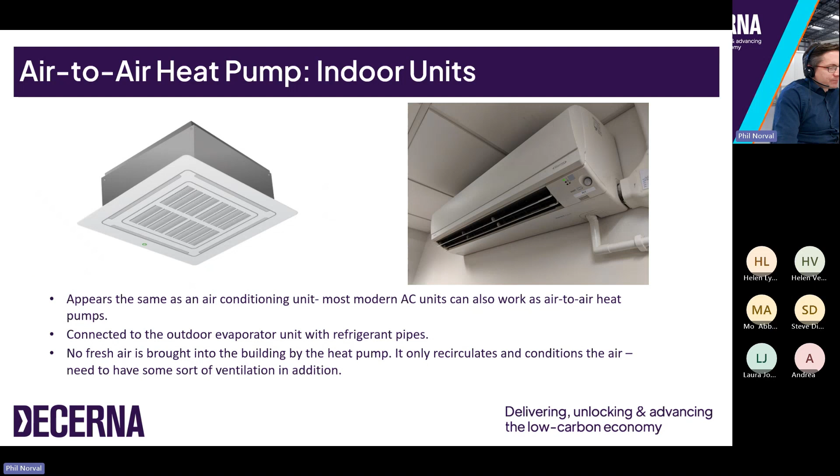Similar pros and cons to air to water heat pumps. They are usually slightly more efficient than air to water heat pumps because there isn't that extra stage of having to put the heat into water. You're just directly putting it into the air. So they're a bit simpler and a bit more efficient.

Again, the running costs, though, similar considerations to do with whether you're replacing direct electric heating or replacing gas heating. The cost savings might be extremely modest if you're replacing a gas heating system with air to air heat pumps. They're usually very simple. It's just an outdoor unit connected to an indoor unit via some refrigerant pipework. So they can be installed in a multitude of different situations. And the other benefit is, of course, that they can provide comfort cooling in the summer as well as heating in the winter.

With air-to-air heat pumps, as you might imagine, the cost of an indoor heat pump unit is much higher than the cost of a radiator. So buildings with lots of individual rooms that might need lots and lots of individual indoor units could get very expensive. So it might be worth in those situations to consider an air-to-water heat pump instead. Otherwise, similar considerations to bear in mind as with the air to water systems.

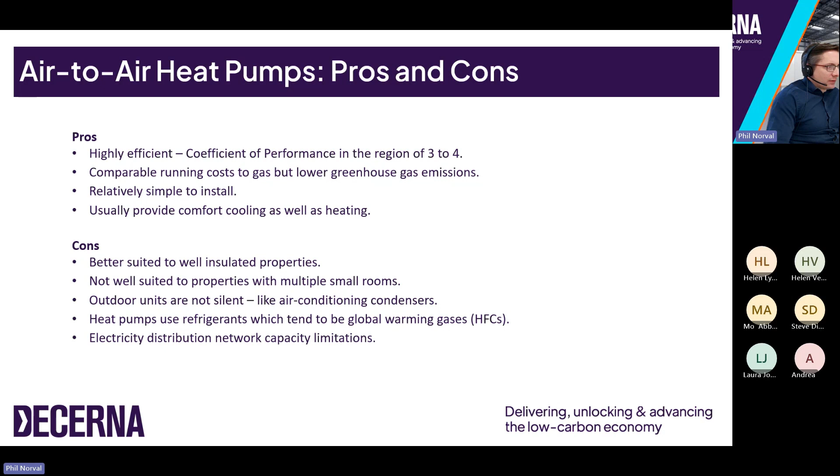Finally, ground source heat pumps. People used to get quite excited by them a decade or so ago, because they traditionally have a higher coefficient of performance than air source heat pumps, because the ground temperature is much more stable and the heat exchange is more effective. So they traditionally have quite a high benefit in terms of the energy efficiency, but these days, compared to modern air source heat pumps, there's not that huge a difference, but the cost difference is massive.

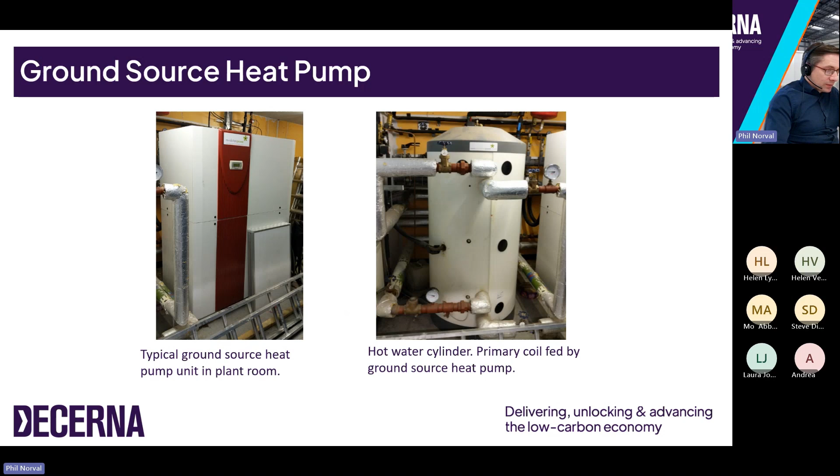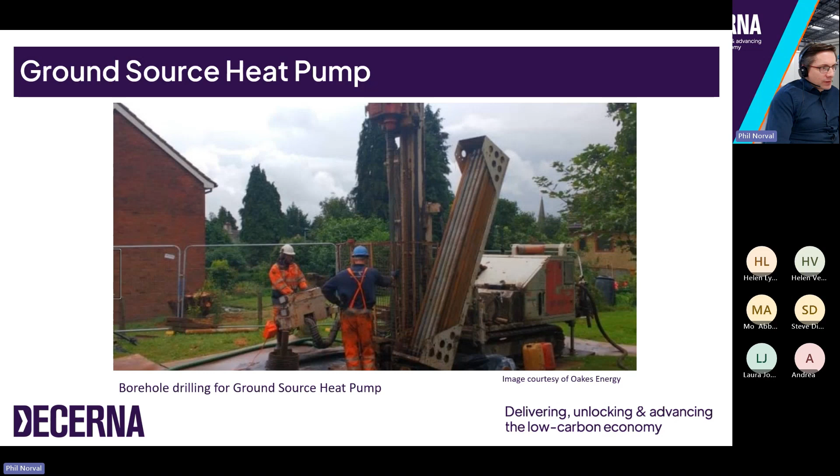A ground source heat pump, as you can see here, uses quite sizable equipment. You have to either dig up a large area of ground to put in the pipework that collects the heat, or you have to drill vertical boreholes, which are very, very expensive, thousands of pounds per hole. The overall cost of a ground source heat pump is very, very high, especially compared to air source heat pumps, for only a modest gain in performance.

So otherwise, at the end of the day, it's another kind of heat pump. So some of the benefits are the same as with the other forms of heat pumps, such as lower greenhouse gas emissions, lower operating costs, especially compared to electrical heating. Very reliable systems, as long as they're kept simple, once again. But the other similar disadvantages as well, but the major one is how expensive they are, particularly due to the groundworks that are required. And hence, in this country in particular, they're really not very popular unless it's done on a big scale.

So that really is it, and that's a quick whistle stop tour of renewable energy systems, just to give you a bit of a base level of knowledge if you are considering any of these large capital projects. Doing it properly is the quick win in this situation. If you're committed to installing some renewable energy, just being armed with a bit of knowledge is the way to do it properly and the way to get the most out of it.